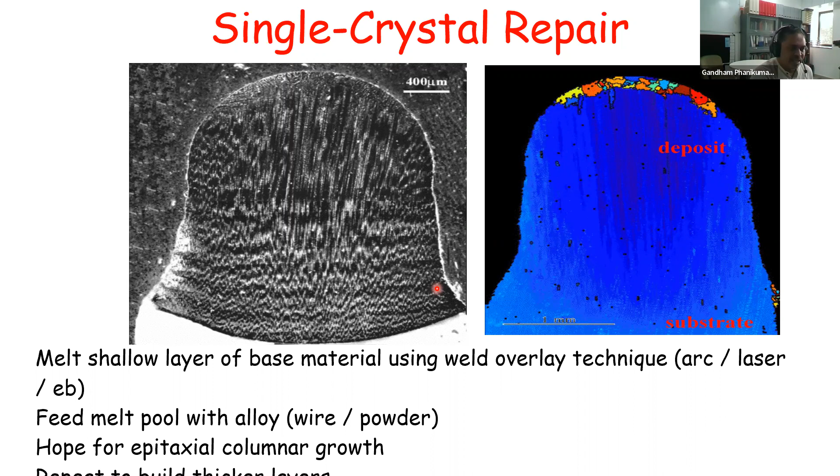As you could relate, the single crystal is able to grow all the way to the top, and that's how the single crystal was repaired. It's not actually very easy. So today in 2021, through additive manufacturing, it is being attempted again, and there are some successes already. Here is how it looks like.

The initial work was done by Wilfried Kurz in Switzerland, at EPFL, and he published his paper in '99. From then onwards, people were very excited that you could grow microstructures of what you like using laser deposition. Today that is called directed energy deposition, and the enthusiasm started to pick up.

If you were to make a bead using laser and chop it in two sections, this is a transverse section, and you would see that for a single crystal, if you melt it, you would actually get different orientations of growth. On the left hand side, the growth was happening laterally, and at the bottom it is vertically above, meaning there is a specific preference with respect to crystallographic orientations for growth. This is something we will delve into deeper as we go along, and also see how it can be taken advantage of.

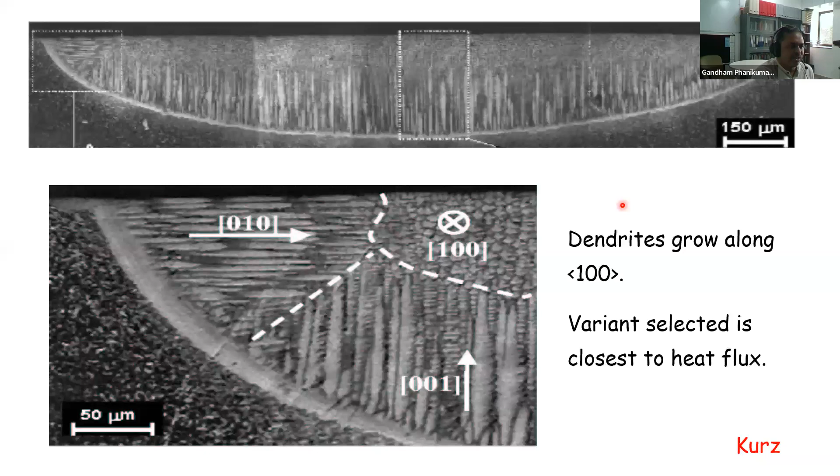Partly this is responsible for the improved strength of additively manufactured components, but it's also important to know that the nature of defects or microstructural formations like grain boundaries and cell boundaries are still relevant within additive manufacturing as well. For us to understand them is important to avoid any defects that will come, so I will actually discuss the defects as we go along.

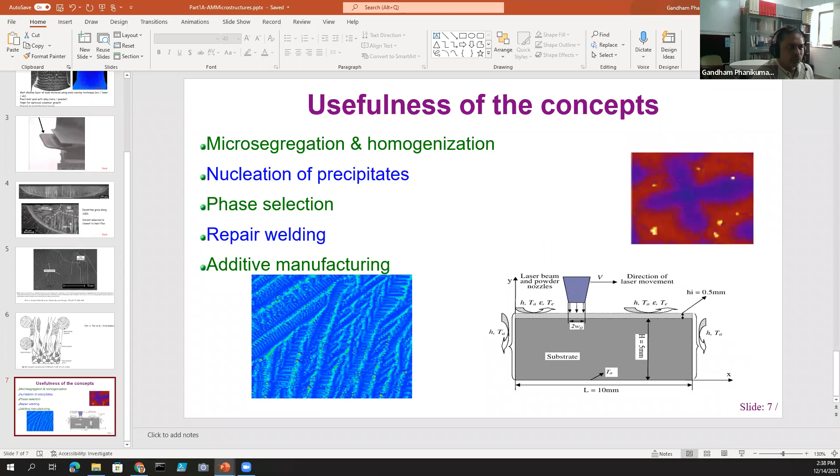And so solidification and defect formation becomes quite important. So what I do now is go on to open another PPT where I have the solidification concepts, and I do that to essentially illustrate some of these things.

Because I'm assuming that the majority of the audience could be from a mechanical engineering background. Can one of you respond if that is true? For example. Yes, Professor. Yes. Okay. So just 5-10 minutes of basic concepts of solidification may be useful for you, because that is happening.

So now you see my presentation has changed to the solidification concepts. Here is a video that shows you how an ingot is solidifying. The heat is going away from the left, right, and bottom walls, so the solidification is happening from left, right, and bottom. This is typically thought of as a tiny ingot in the case of additive manufacturing, so the liquid pool is like a tiny ingot. Solidification is happening very similar to the ingot casting shown here.

The contrast of a bright region being solid and a dark region being liquid is because of refractive index difference. You see that the solid that is forming is actually moving around, it's not growing straight from the side or bottom, it is actually moving around. So there's some convection that is also playing a role.

And these solid fractions are getting accumulated at the bottom, which is how the equiaxed microstructures are seen, because each of these solid particles is growing in the liquid equally in all directions, and then they are getting deposited at the bottom, and therefore you see that the equiaxed zone can be explained.

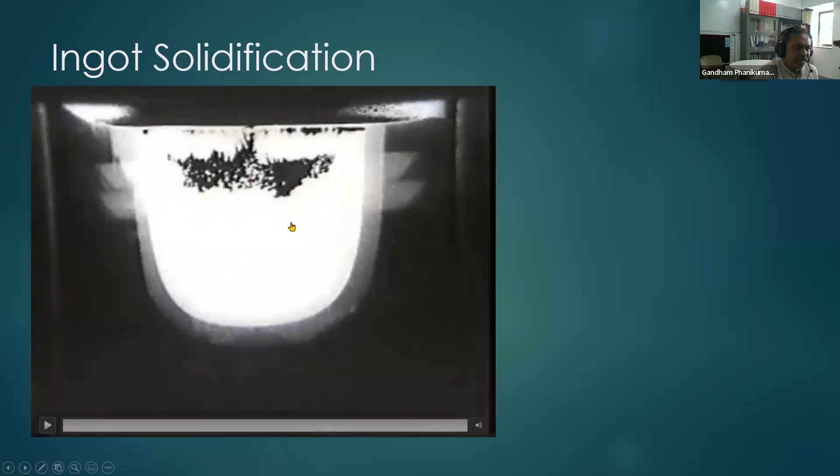As solidification nears finishing, some region of the liquid doesn't fill up the void, so you get shrinkage, known in casting as a pipe defect. In laser additive manufacturing, if the powder after melting doesn't fill the entire space, you get porosity. So the origin of porosity can be incomplete melting, which is one of the regimes we will see.

You can think of the laser molten pool as a tiny ingot, so learning how an ingot solidifies is useful to explain this.

Often we see microstructures in additive manufacturing with a cellular appearance, tiny regions of uniform spacing. This happens because the solid front moves into the liquid as a cellular front due to solidification microstructure evolution caused by the so-called Mullins-Sekerka instability. Originally if it starts as a planar interface, due to thermal fluctuations, the interface breaks and forms cells.

The cells are very stable structures and can have different orientations. You can see a grain boundary between two cells because their orientation differs, and there's a triple junction of grain boundaries, with one boundary growing this way. This is the solid-liquid front: this side is all liquid, and this side is all solid.

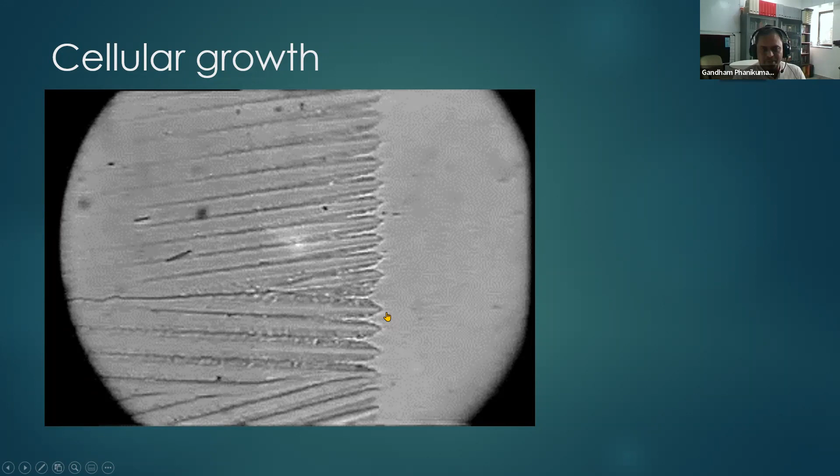Good question. This is at a large scale, and that is at a small scale. To give an analogy, when you look at a forest from an aircraft, it appears like a patch of green region, but when you descend into the forest you see the trees and branches. It's a matter of length scale. The ingot is at a large scale, on the order of the size of the melt pool, while the cellular structure appears when you zoom into a fine length scale, roughly a hundredth to a thousandth of the size of the ingot. So it's the length scale difference that made those patterns not visible earlier.

Okay, there's another question. In the ingot solidification part, when it was starting to solidify, we saw particles jumping off from their position and settling at the bottom. Can we predict before, and from where, the particles will get solidified and come to the bottom?

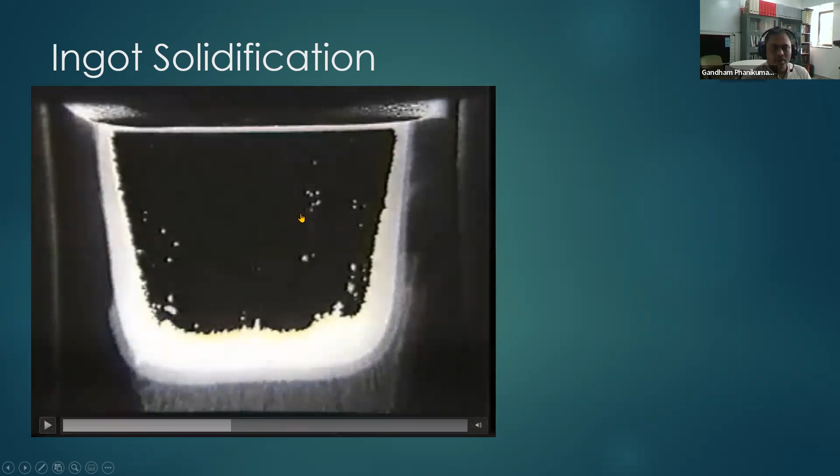Yes, it is possible. This motion of the liquid in ingot casting is predominantly due to buoyancy convection. In a laser molten pool, such as in additive manufacturing, it is predominantly due to Marangoni convection, which is surface tension driven. If the laser heats this region of the melt pool, the temperature is high here and low there, and that difference causes a surface tension driven flow called Marangoni convection. Today we can simulate these convective patterns and predict how the solid detaches and circulates inside the pool.

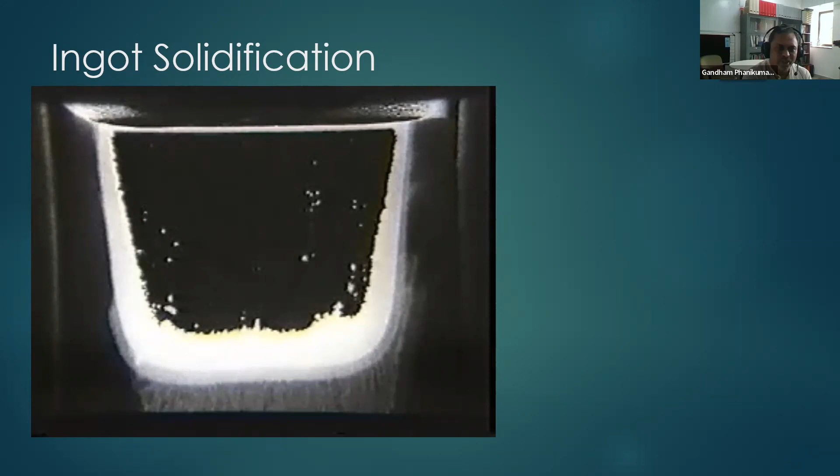This is actually a very well established topic. There's a paper of mine, first author Mohan Raj, from 2001, you can look at it. More recently, Arvind Kumar from IIT Kanpur, about 7 or 8 years back, showed the same kind of appearances in simulation. So it is possible to simulate these phenomena quite accurately today, but what I'm showing you here is experimental, so you get familiarized with the physical phenomena.

When you zoom into the solidification front a bit closer, you will actually see some tree-like appearances, which are also called dendrites. Nickel-based superalloys are very commonly found with this dendritic pattern, and the reason the dendrite pattern forms is because of anisotropy of its growth and surface tension.

Pay attention to the fact that there's latent heat released by the growing solid, because of which the side arms cannot grow, while elsewhere it will grow. So wherever interaction between the solids happens, latent heat is released and the side arms don't grow. A lot of patterns growing during solidification can be understood once we know how this interaction happens due to release of heat during pattern formation.

Now, what is it that is in between the trees? It is basically the liquid which is yet to finish solidification, and that is enriched with solute. In the case of superalloys, it will be enriched with aluminum, titanium, or niobium elements. These lead to segregation patterns, which if you etch, you can make out as dendritic appearances. So one can etch and look at the microstructures to see these patterns.

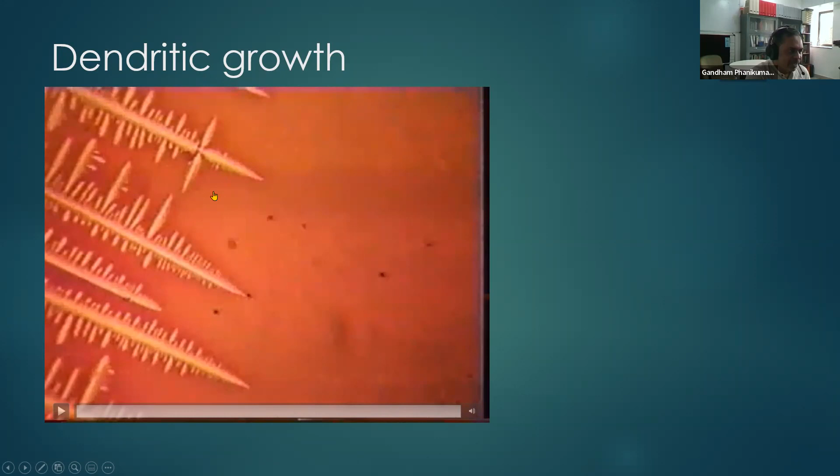The intermediate dendrite liquid will solidify and lead to full solidification. Sometimes if the liquid was not enough, it cannot come in, and then you see a defect called cracking - hot cracking will occur. We will come to that.

Now, how does this pattern formation actually happen during solidification? Here is a video showing a grain of solid as it grows. As it grows, you can start seeing the dendrites forming, and like a tree they are all growing, with a grain boundary also forming here - so this is a grain boundary.

These are all parallel dendrites that are growing, and in between them is the interdendritic liquid, which after finishing solidification will merge.

Now the reason why the planar front initially became cellular and then dendritic is because of the instability I mentioned, which is caused by the segregation of elements. It's called the Mullins-Sekerka instability criterion.

Of course, the starting point of it is so-called solutal segregation or constitutional supercooling. But Mullins-Sekerka instability is a better way of calling it, because in laser additive manufacturing the extreme speeds will play a role, and therefore Mullins-Sekerka is a better way of referring to it.

Now, when you wait for the solidification to finish, you will see that the interdendritic region will start to merge with the rest of the solid, and the patterns seen here will start to disappear because the liquid is finishing its solidification. At some point it becomes just a few dots of interdendritic liquid, which will also finish solidifying, and eventually you will see no contrast because it is all fully solid.

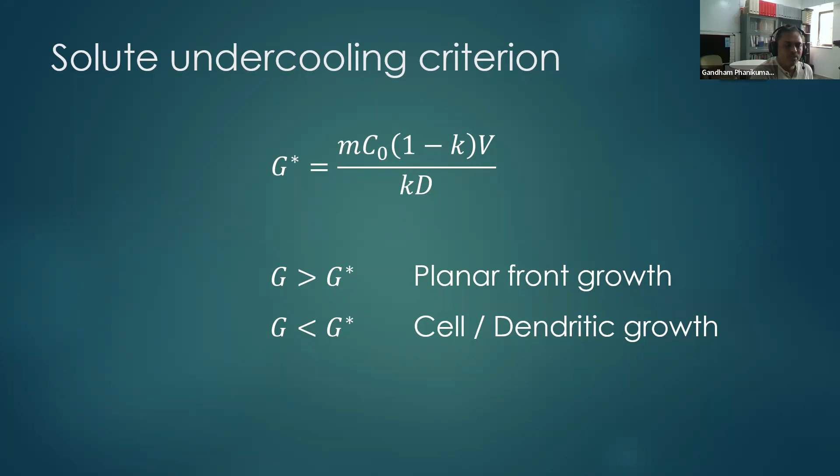This is the criterion I was talking about, the solute undercooling or constitutional supercooling criterion, which tells you when breakage happens. In additive manufacturing, the velocity, partition coefficient, liquidus slope, and concentration of the liquid are all known, so you can predict what conditions give you cellular formation. You'll see that you are actually in the regime where cells and dendrites are more stable for most additive manufacturing conditions.

Now, the equiaxed microstructure formation is evident here. Whenever undercooling or driving force is available in front of the liquid, instead of grains and dendrites growing, new grains nucleate in front. So equiaxed microstructure can form.

I'll repeat this again, since it's a very important phenomenon. You can see that in the liquid, the solid is nucleating, and these are the equiaxed grains nucleating because there is enough driving force for that to happen. That is also possible in additive manufacturing - if you go slow enough, you may have equiaxed growth taking place.

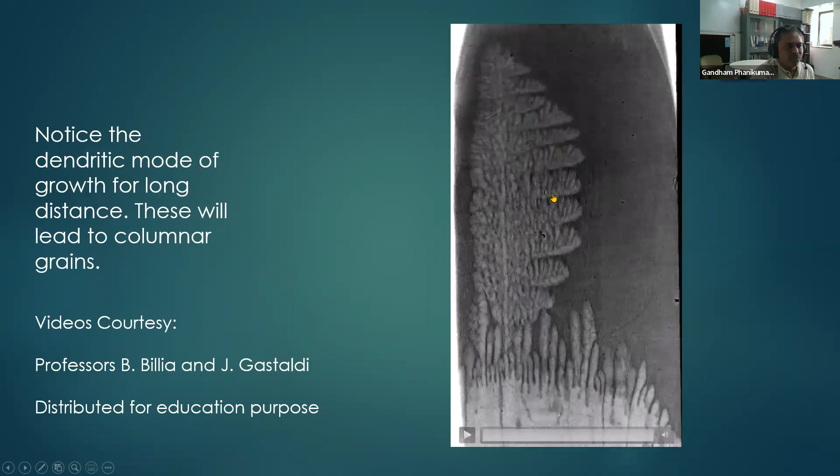Here is one more illustration showing how dendritic growth takes place, and we would like to be able to switch between these modes by changing process conditions, as we do here where equiaxed growth is also recorded. This is a synchrotron visualization of an aluminum alloy. The equiaxed microstructure formation is something you are seeing with your eyes, except enlarged and shown to you. But in real additive manufacturing, it's all happening at a scale less than 1 millimeter for the entire zone we are seeing.

Sir, yeah, sorry to interrupt. The microstructure you have shown is just for the first layer?

Go ahead. As we go along in some slides, I will show exactly which part of the laser molten pool is like that. It's actually a microstructure behind the laser. If you section it longitudinally, you can see these patterns quite clearly in any laser additively manufactured component. If you know which way the laser is moving, you can slice the bead, one single track, and identify these zones. In multi-layer deposits, full component deposits, you can at least see the shape of the pools, and within the pool you'll see the growth happening laterally. So you can relate the microstructures with what I've shown you.

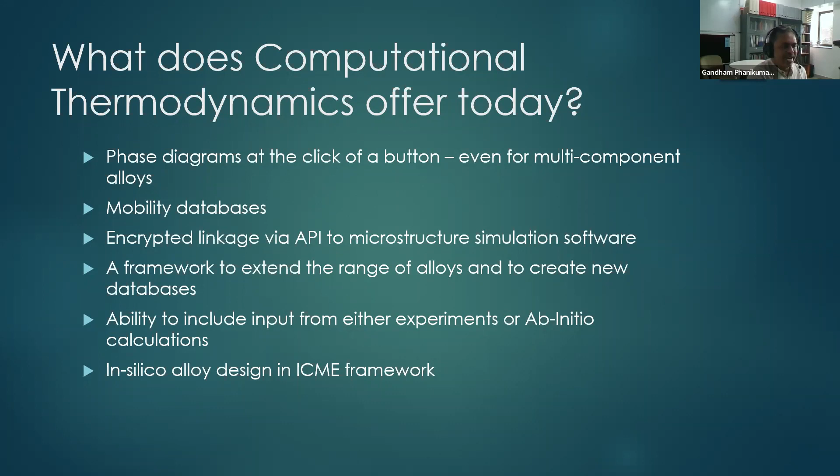At the click of a button, you can actually simulate these microstructures and look at how they change. So there are software tools available to do various aspects of what I have shown you.

Specifically for microstructure, there is a software called MICRESS, which uses the so-called CALPHAD approach to represent the driving forces for microstructural formation. It uses databases from Thermo-Calc, which are essentially encrypted databases of Redlich-Kister polynomials. For alloys like aluminum alloys, steels, nickel-based alloys, and so on, you don't need to worry about what microstructure will come. You can actually predict it because they are all simulatable, and I will show you some examples from our own group also.

So today, as you look at the various stages of alloy development, like casting or printing, or porosity, eutectic phases, precipitation, all kinds of things are now possible to be captured by simulation.

The software we are talking about, MICRESS, talks to Thermo-Calc and takes into account the actual alloy information, giving you parameters such as driving force, chemical potential, Gibbs energy differences, compositions, and properties like heat capacity and so on. Therefore, it will actually be able to simulate the microstructure. So that is a capability today.

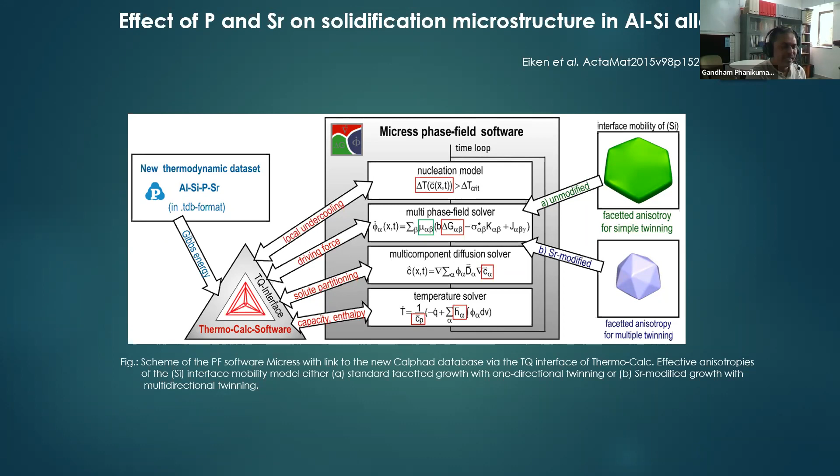By understanding the microstructural aspects, we are not necessarily going to an empirical approach, but there are tools available which allow us to even simulate and play with them to optimize a particular microstructure to be obtained by a particular 3D printing exercise. So I will now go further to show you some developments in that.

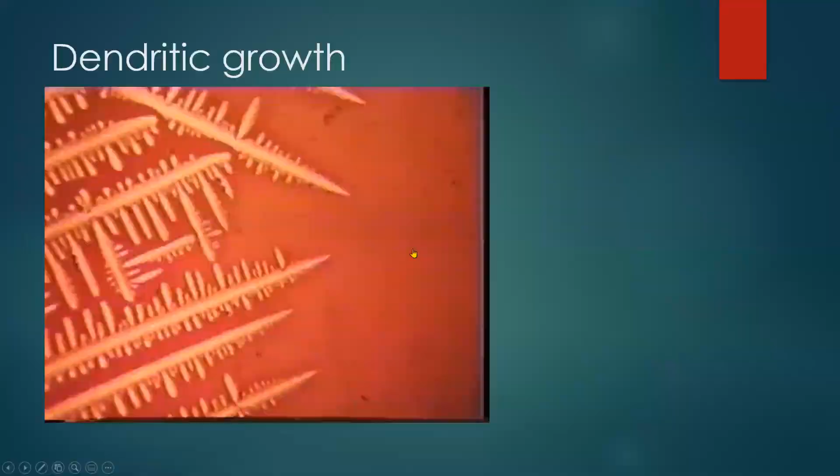Yeah, go ahead. Sir, in the previous presentation, could you open that for a while? Yeah, I can open it again, don't worry. So where do you want me to go? The previous two pages earlier. This one? No sir, the next one. So here, the previous one. Sir, the previous one. This one? Or this one? This one, sir. Okay, okay. Sir, if we play this, the thing.

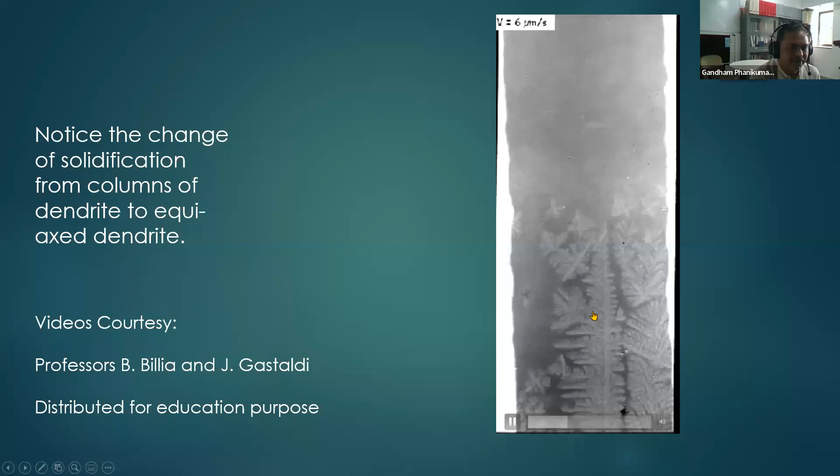So what you are seeing, I will tell you. It is actually initially growing slowly, then the speed has increased. So what happened is that initially it was growing as dendritic, but later on the equiaxed growth has taken over. This transition is called columnar to equiaxed transition. This transition happens in ingots, it happens in welding, it happens in additive manufacturing also.

Sir, if we start it from the beginning, there is a point where these grain structures are falling down. Yes, sir, please play it again. Yeah, they are falling off. Yes, yes, yes, sir. Sir, but some of them get stuck there. So there must be some opposing force against gravity, right?

So maybe I should tell you how this is done. This particular visualization was done between two graphite sheets, with a thin 150 micron aluminum alloy sheet kept between two graphite sheets, and then they were held by a boron nitride capsule around it, and kept in the path of a synchrotron radiation.

So what happens is that sometimes the grains are stuck to the wall, and some of them are nucleated between the walls, and therefore they are free, and therefore they fall in the liquid. So if they are not falling, it is not because there is an opposing force. They are just nucleated on the wall, and therefore they are stuck on the wall. That's all. Okay, that's the only reason.

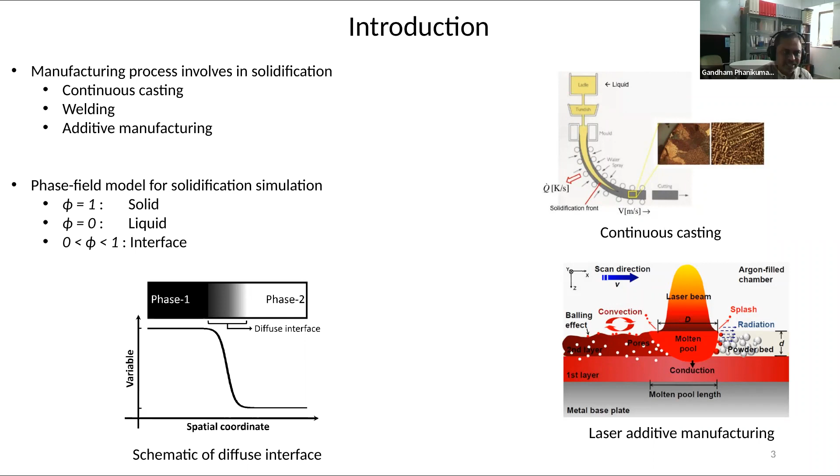So that is the scale we are talking about - a micro scale compared to the component. These ideas of solidification apply to continuous casting, ingot casting, and welding too. What happens in laser additive manufacturing is of particular interest for this workshop, but it's the same concepts, except the length and time scales are much smaller. That's the only difference.

Now, these are some of the equations we solve to understand microstructure evolution. Some of you interested in the mathematical approach can reach out to me. Ours is one of the few groups in the country doing this phase field modeling, and we have released our programs open source. If you search for microsim on GitHub, you'll find the programs that simulate what I'm about to show you. That's something you can also explore if interested.

Now, these solidification models have parameters important for an additive manufacturing engineer to know. For example, the thermal field is modeled with a given temperature gradient and laser heat source velocity. This means that when you change the laser velocity, or change the temperature gradient by preheating the powder bed, you are changing the thermal field during solidification.

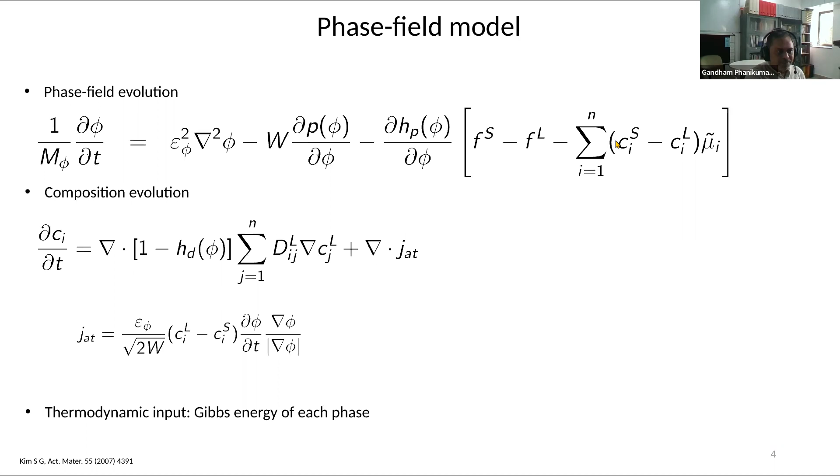Once you change the thermal field, it affects the driving force, and therefore it also affects the microstructural formation. So that's what we'll see here.

Earlier I showed you dendrite formation. Here is a computational dendrite, done on the computer to show the segregation of elements like niobium or chromium in a superalloy. The enrichment of niobium is shown here - wherever it's red, there's more niobium; wherever it's green, that's the average value. You can see niobium is segregated between the dendrites.

This is important because excess niobium can lead to Laves phase, which is bad news. So the ability to simulate segregation is important.

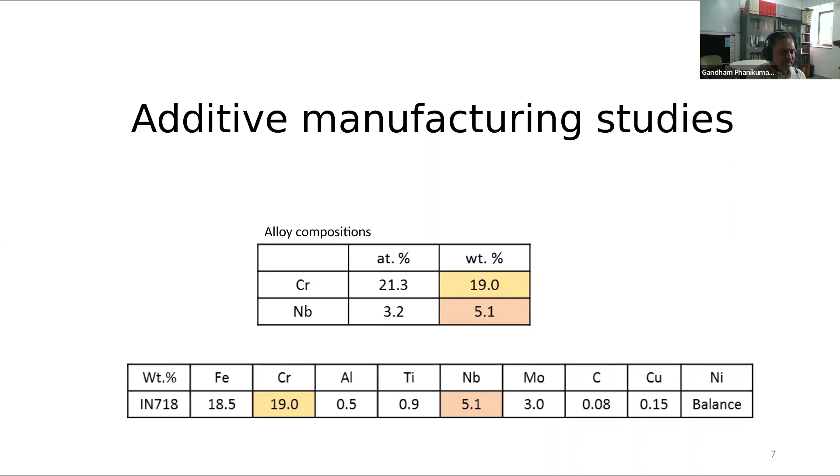Now in additive manufacturing, you can do that. The challenge in the past was that there were many elements - a superalloy has so many elements, so simulating microstructure evolution with all the elements was costly. But today it's possible, so we took this up to show you. Seven elements can be considered, and Mohan has done his simulations on a multi-component alloy.

You can simulate microstructure evolution in the computer at different processing conditions, like temperature gradients of 10 to the power 5 Kelvin per meter, or 10 to the power 6 Kelvin per meter. Think of it this way: if you preheat the powder bed, the temperature gradient can be reduced; if you don't preheat, the temperature gradient is high. So you can think of this microstructural difference as what happens with and without preheat.

The temperature gradient actually makes a big difference to the microstructural evolution. You can see that at lower gradients you get dendrite formation, whereas at higher gradients you get only cellular formation.

And therefore the spectrum of compositions explored is also different. You see that the segregations are much more severe when you have the interlocked regions in the lower gradient, but in higher gradient you do not have that problem. There's hardly any region that is red in this domain, which means segregation is not such a big problem. So that is a clear indication that by playing with the gradient, you can actually get the segregations under control. That's a first hint we can get.

And then we can also do a time evolution of what's happening because this is done in a computer. So to visualize what is happening during solidification at a small scale, you can do it in the computer. As time increases, you see the pattern formation changing for a particular gradient and velocity, which means the time evolution of pattern formation can also be understood, which can lead to explaining what happens at the beginning and end of a track, for example.

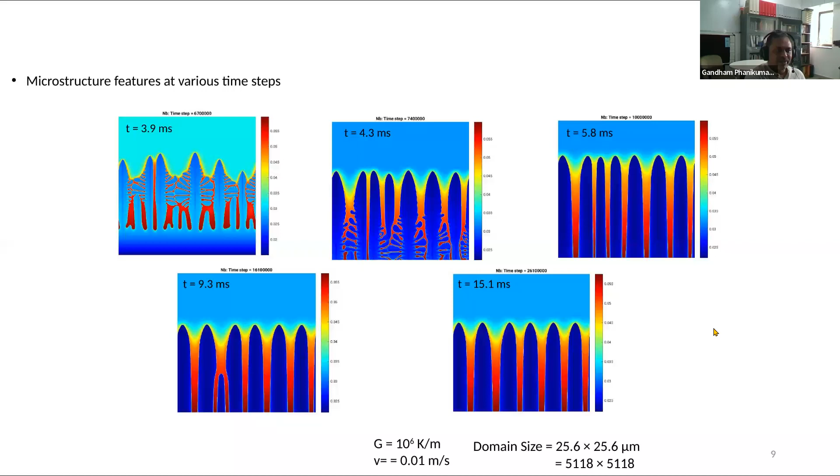Now we also benchmark these simulations. Here is an experimental specimen. The tracks are here, the laser tracks, the cellular patterns of the laser track is here. When you take a line and do the compositional analysis, you see ups and downs of the composition, like chromium content or niobium content. The simulation is shown in the bottom figures, showing we can reproduce those ups and downs of the composition quite well, in terms of wavelength and amplitude of the composition variation. If you calibrate it for one sample, you can reproduce it for many samples.

So this microstructural variation is something we can simulate and therefore also control, because we can always simulate for conditions and then go on to print such that we have the segregations as we want.

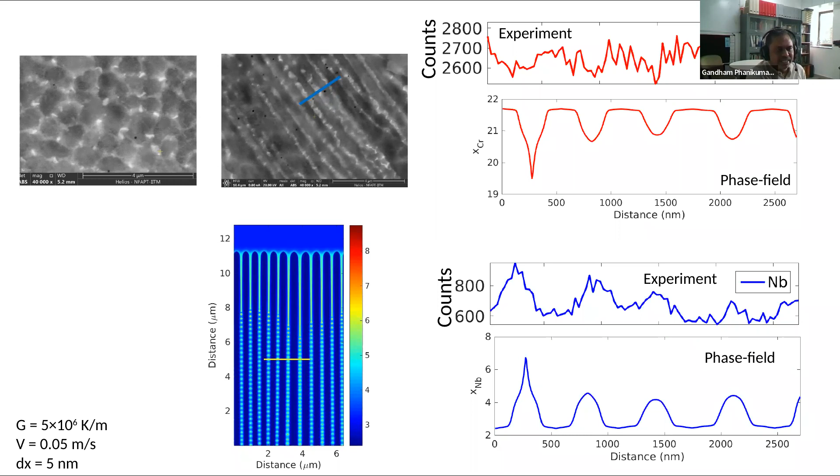Now what is the use of doing this? The advantage of doing simulations is that you can find out whether we can calibrate some known models of the spacings of the printed microstructures. Lower spacings mean higher strength. So we can calibrate such correlations, and thereby predict how the spacings change when you change the process condition.

So if you are changing the temperature gradient or changing the velocity of the laser, how does the primary dendrite arm spacing change? That variation can be calculated based on simulations you have done, and later you can use it for extrapolation. That is the idea.

Now, if you change the cooling rate also, these things will change, which means if you play with, let us say, helium removing heat from the laser printed component compared to argon, the cooling rate is more with helium. How that affects the microstructure is something you can predict by doing these simulations.

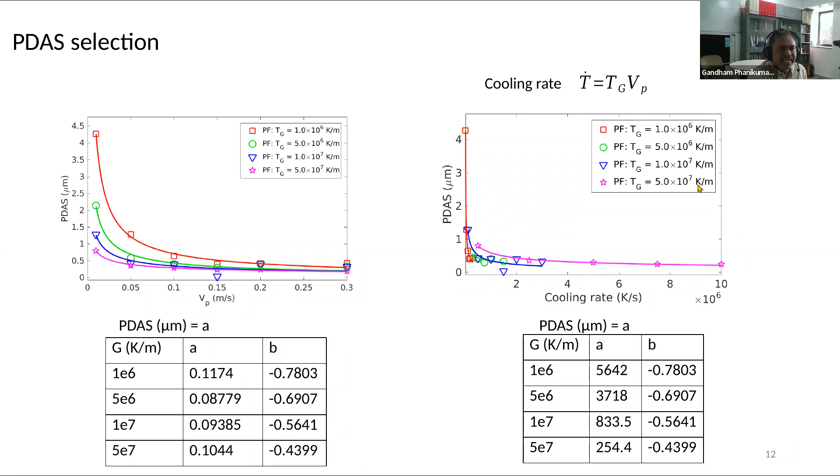So the primary dendrite arm spacing, for example, if you look at the red squares versus stars: red squares show that at lower gradient you are lower here, and at higher gradient you are up here. That means for a given cooling rate, the primary dendrite arm spacing increases if you have a higher gradient. Or, keeping it horizontal, a higher cooling rate would correspond to a higher gradient for the same microstructure.

So we will be able to understand the microstructure at every aspect of it, which is experimentally not possible. For example, what is the driving force at the tip of a dendrite? What is the undercooling we are facing, and what is the temperature of the tip, etc.? All of that can now be calculated, because once you have a calibrated model, we can do many of these calculations which are not possible experimentally.

Now, experimentally measuring the compositions is also available, but it's not possible to locate it everywhere, because the electron beam, which calculates composition in an SEM, has a particular volume from which the composition is measured. So if you want to make a composition map, it's very painful, and you can only do it in 2D. If you want to see how the compositional variation happens in 3D, phase field simulations can give you that. Here is an example of the chromium composition contours and the niobium composition contours in a three-dimensional representation, which is entirely possible.

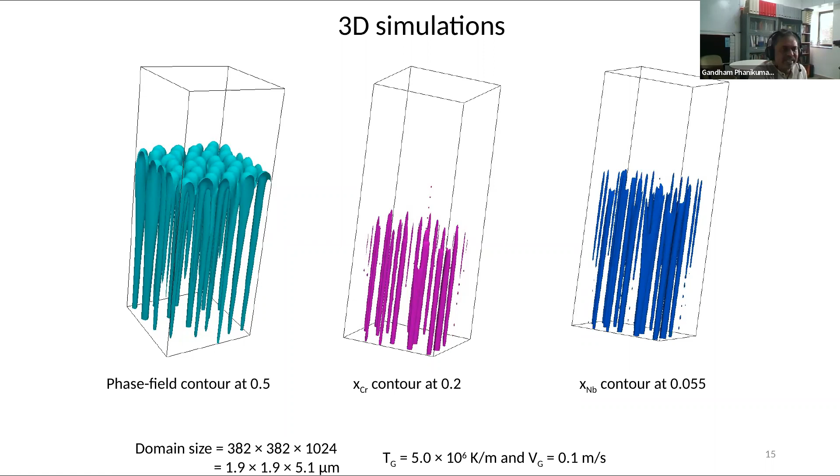You can look at these to see how the islands of compositional contours lead to a lock-in of phase formations, which we related to Laves phase formation at locations where the chromium and niobium content is high.

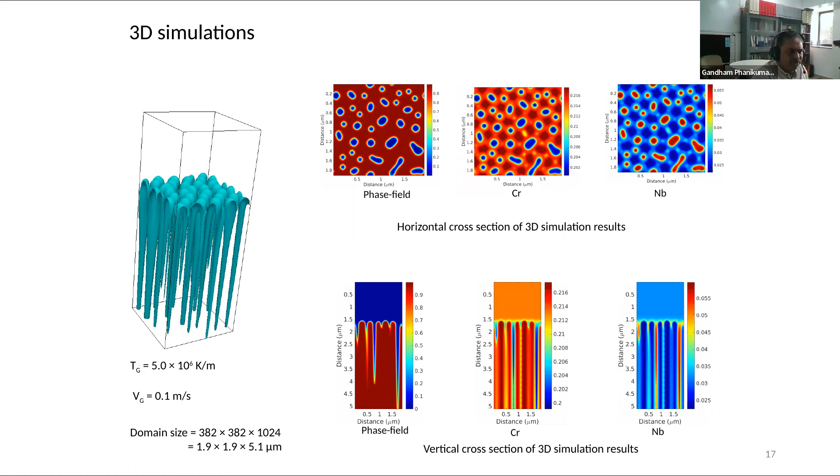That's a clue that we can use these simulations to start predicting the phase formation. So we will do that. We have validated these, and we will try to do that.

We refer to the so-called Thermocalc-Scheil calculation, and as a function of temperature gradient and velocity, we ask what would be the fraction of Laves phase formation and what would be the fraction of delta phase formation in superalloys. This shows there are processing conditions where it is very high, and certain other conditions where it is very low or tolerable.

This means you can tune the velocity of the heat source or the temperature gradient, via the powder bed heating or preheating, to actually achieve the fraction of the detrimental phase under control. That's a very powerful idea.

So Mohan's work has shown that there's a relation between the processing conditions and the detrimental phases that may form in the additive manufacturing scenario. The gradient values we have explored are relevant for additive manufacturing.

We can also go on to predict the kinetics of phase formation, because these can be calculated. When we do that, we are able to show that certain phase formations have a fairly leftward curve, which means their probability of formation is high. So those are the kinetics we can do.

We can also do bicrystal simulations to show how the space between two grains helps the liquid be present, filling the space and leading to prevention of cracks or not. So all those things can be done.

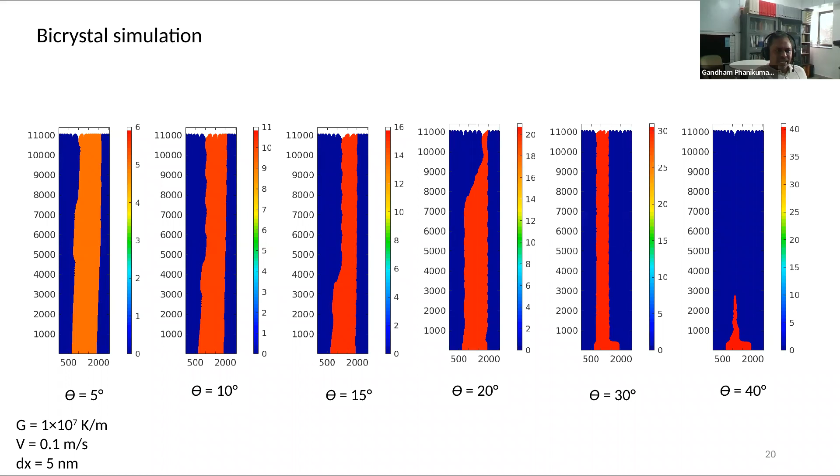So that kind of indirect estimate on the effect of grain misorientations on crack formation during solidification can also be thought of. Is crack formation a big deal? Of course. Those practicing additive manufacturing know that with certain alloys, they simply cannot make the cracks disappear, and that is something we need to understand quite well.

We can also do this for not only two grains, but multiple grains, to understand how segregation happens and how the grain boundaries are actually locations of slightly higher segregation. These are also benchmarked with respect to experiments, and we have to thank our colleagues for their help in doing these simulations.

I'll stop here and see if you have any questions on this aspect of microstructure formation before I move on to the remaining aspects.

Good afternoon, sir. Yeah, proceed. Yeah, sir, this is Pramod from IIT Palakkad.

Sir, when you show these simulations, but when we are doing the actual experiments, we generally play with process parameters like laser power, scan speed, hatch spacing, those. So, sir, how can we correlate those process parameters from experiments with these simulation parameters?

There are two ways. If you are looking at only the gross estimates, like what would be the porosity or the susceptibility to cracking, then there are some non-dimensional numbers that are defined. We will come to that in a moment.

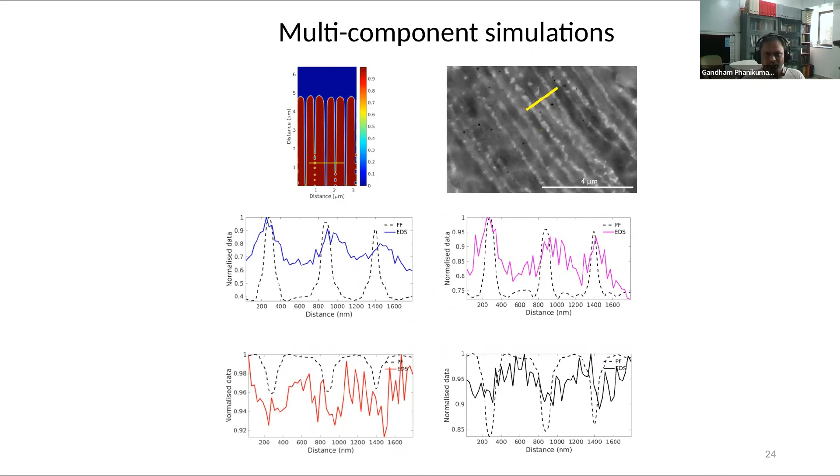Thank you, sir. My question was in context with, like, if I'm trying to develop texture control using additive manufacturing. Yes, so in that aspect, this is the way you should do for texture control.

Actually, there will be 3 models available. 3 models because you need the system scale model for the thermal field evolution. You would also need a grain structure evolution with the orientation information that is being captured. And you also need at the microstructural scale for segregation, because the segregation is relating to the interfacial energy, and interfacial energy plays a role in the grain selection, which leads to texture basically.

So the 3 levels that are available, and my student Hariharan is working on that topic, not specifically texture control, but his work has those elements in it. I'll be happy to put you across with him, so he can tell you which tools he is using, and therefore you can also then try the same. The tools are available.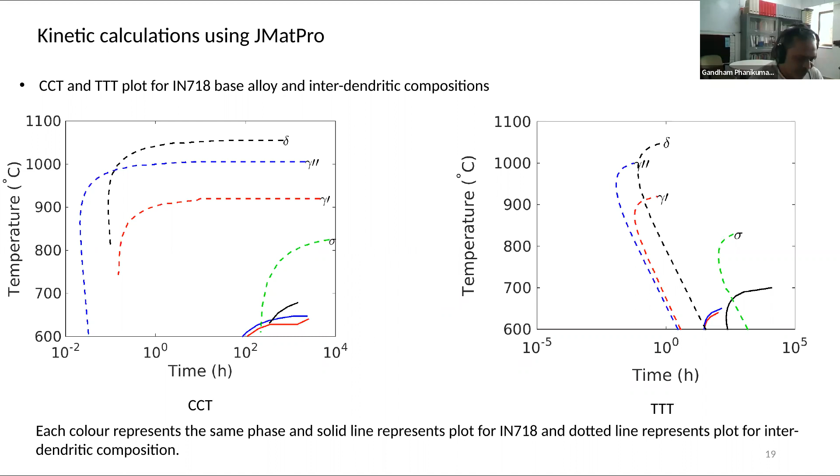Okay, so let's move forward now. So we have got porosity now. We just mentioned, so I will talk about porosity.

Okay, so this is about Hariharan's work. He is a joint student with Professor B.S. Murty and myself, and some ideas of porosity formation as a defect formation I want to show you.

Okay, now there are two. If you see porosity in an additive manufactured component, it might have had basically 2 origins. The first origin is because of keyhole. The keyhole idea, I have actually described the concept of keyhole formation in high energy beams in my NPTEL lecture on YouTube.

So if you search for NPTEL lectures with my name, you will see one of those. I have explained the keyhole formation, the vapor formation, etc. Now here I would just briefly tell you that when a very high power laser is incident on a metallic material...

...and if the temperature is increased to the extent that a small amount of vapor is formed, then that vapor will absorb the laser heat completely. Suddenly the efficiency of absorption will go from 10-15% to 100%, and therefore the laser will penetrate much deeper, and it will form a vapor column.

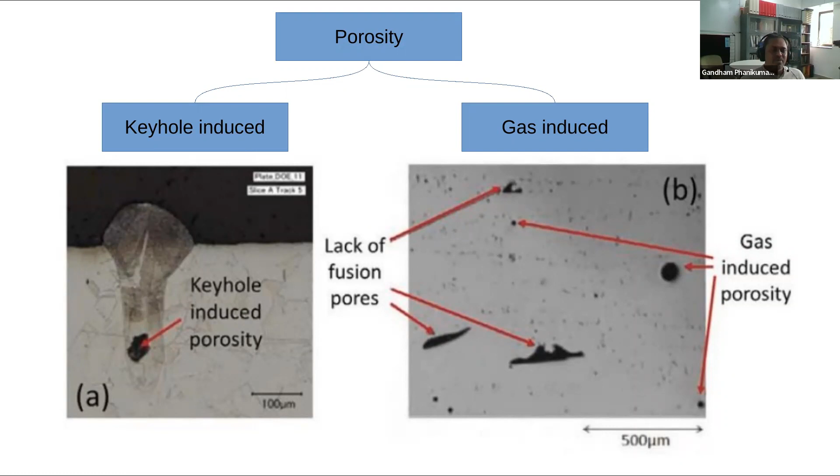The gas-induced porosity is difficult to eliminate using the powder characteristic, laser characteristics, because it is actually coming with a contribution from the powder consumable. So it's a consumable problem basically. As you can see, there is a way by which we can understand defect formation in additive manufacturing.

Lack of fusion and keyhole both give you porosity, but they're on different sides of the power spectrum. With very high power, you get keyhole porosity. With low power, the velocity is too fast and doesn't allow the powder to fully melt, giving you lack of fusion porosity. You have to distinguish between these two types and balance them to get a good deposit. Balling is another defect, possible when your power is high but you don't have enough time for it to sink and deposit at the bottom of the powder bed, so it can lead to cohesion with the rest of the solid.

There's a nice review by a leading expert, DebRoy, on these aspects, because quite a bit of our understanding is coming from welding. You could look at that review for more on this.

Now here's a very nice paper, which I like very much. It's also very recent, from this year itself, where they discovered a non-dimensional number using which you can predict what density you will get, that is, how much porosity you can eliminate. This is something where, without going into the details of microstructural formation, you can empirically predict what kind of density you can get. We have verified this and found it to be a very good measure.

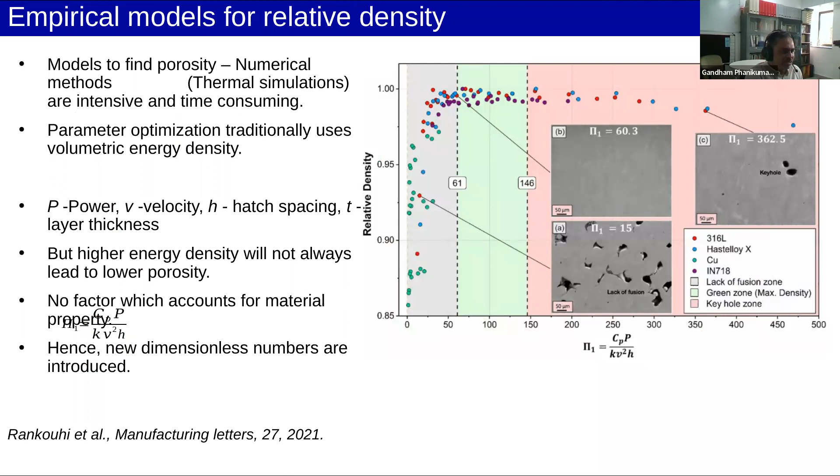This data has come from multiple alloys, so it's fairly good, and it's available as an empirical correlation in the paper. That correlation is given here, and it takes into account the energy, or power input to the powder, E_in. E_in itself is defined as a combination of parameters: power, velocity, hatch spacing, and layer thickness—power divided by the three quantities velocity, hatch spacing, and layer thickness. That E_in going into the calculations is a good idea because it takes into account some of the physics.

So these can be used to eliminate porosity formation as a first cut. If you still have porosity, that means there's something to worry about with the consumable material, and that's where we need to do more work. If your consumable doesn't have a problem with too much adsorbed gas or something, this correlation is fairly good to get you the kind of density it predicts.

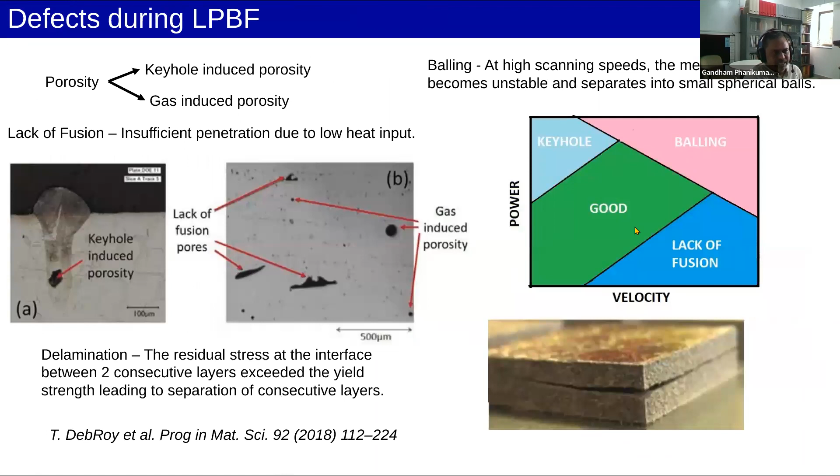Now there's another concept that has come into the literature, again this year's latest paper, called the keyhole number. Basically, this diagram is originally empirical, and it has been explained in a phenomenological manner using the keyhole formation, the likelihood of keyhole formation as a function of the parameters used for the laser: laser power, efficiency of absorption, thermal diffusivity, scan speed, and beam radius. These are all used to comment on how keyhole formation can happen, and the keyhole number tells the probability of that formation—if it forms, you're likely to have porosity due to that.

This is, I'd say, a nice outcome of decades of knowledge about keyhole formation in laser welding. It hasn't come out of the blue—a lot of physics has gone into understanding keyhole formation over the last several decades, and today it's coming into use because it's being applied to laser additive manufacturing to understand porosity formation.

So what you could do is have a scheme where you first do the thermal model, and then using those conditions, check the printable map, which is shown here and available empirically. You can calibrate some of the observations to know where these transitions are occurring.

Once you have that, you can use a single track to do those calibrations and ensure these lines are available, with some statistically meaningful calibration, because powder distributions always have slight width. If you have 30 micron powder, that doesn't mean everything is 30 micron - it's a range of, say, 20 to 40 micron. So certain variation is possible, and if you take those variations into account and calibrate, you have fairly good ability to get tracks which are defect free.

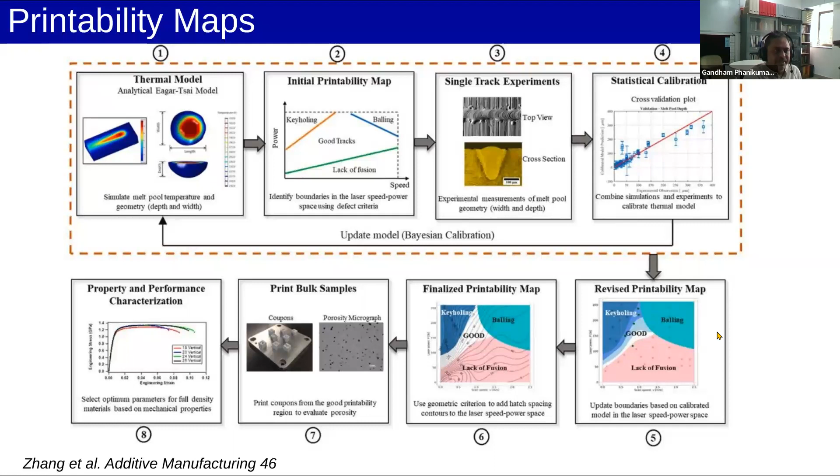Now the tracks are shown here as an example. So visually you can make out, when you make a single track, whether the defect is a balling kind of defect, a lack of fusion defect, a keyholing defect, or a good track. You can do sections to understand which of the 4 regimes of the map we are operating in, and thereby calibrate our specific consumable and processing conditions with this map. After that, we can operate in the region of safety, the white region, which is the good printing region.

Okay, so some suggestions based on the trials which Hariharan has been doing over the last year or so. If you wish, you can get some property data from the ThermoCalc database, because you can avoid having to do serious ML - all the properties are available from the thermodynamic database anyway. So you can use that, he says.

You can also do this for individual alloys, but you cannot do it across alloys, because the properties of titanium alloys change quite drastically when you go from alpha alloys to alpha-beta alloys to metastable beta alloys and so on - individual alloying elements play a big role in segregation behavior and liquidus temperature. So therefore, we have to apply these concepts only for specific alloys.

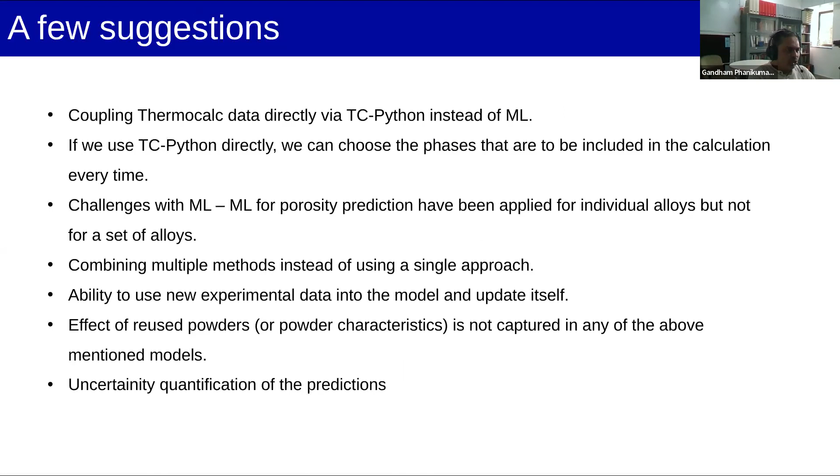Okay, so I'll stop the porosity part here and talk about cracking. But before that, I realized I didn't talk about microstructure formation. I will go there and show you some of that, because that's also very important for conceptual understanding. Then I'll move to crack formation and wrap up.

So we are halfway through now. Let me just pause for a few minutes - you can ask me some questions if you have any, or tell me how you are finding it. Any fundamental doubt that you have, you can ask me now.

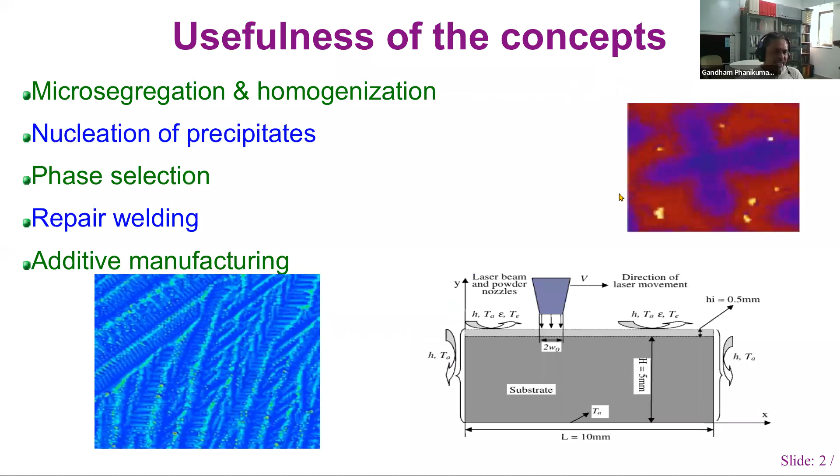I will tell you some more concepts of microstructure formation so that whenever you see the additively manufactured component, you can understand the microstructure slightly better, and imagine what more is going on there. So here is one concept called the interface response function.

In a few months from now, we will be releasing a program which will let you calculate it, so don't worry about the theoretical complications. But I want to tell you that the metallurgical knowledge of the interface temperature during solidification, as a function of the initial composition, the partition coefficient, the gradient of temperature in the solid, the gradient of temperature in the liquid, the velocity of the interface, the radius of the dendrite tip, and so on, can all be modeled today through analytical modeling.

The only difference between casting and additive manufacturing is that in additive manufacturing you always have a build plate, so there is always an initial solid growing into the liquid pool, and therefore thermal undercooling can be neglected. That's the one difference with the model, but the remaining things are all applicable, so one can use the casting literature or welding literature and apply it to additive manufacturing.

So what do we mean by the interface response function is the interface temperature. Now, why is it important will be evident in a moment.

Now, you see that when there is a segregation of elements, as you have seen in dendrite formation, between dendrites there is an enrichment of solute. What happens is that enriched solute, when combined with the liquidus slope, gives you the undercooling or driving force. This kind of driving force is called solute undercooling, or constitutional undercooling. Now, that's a driving force for solidification, and that is one of many types of driving forces.

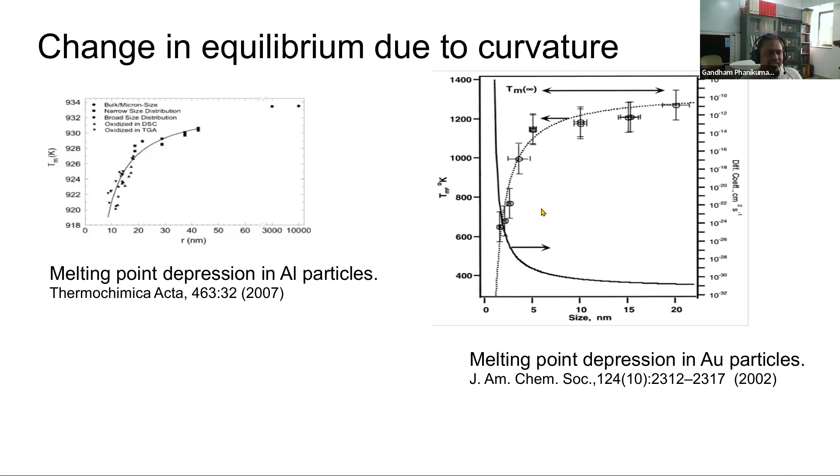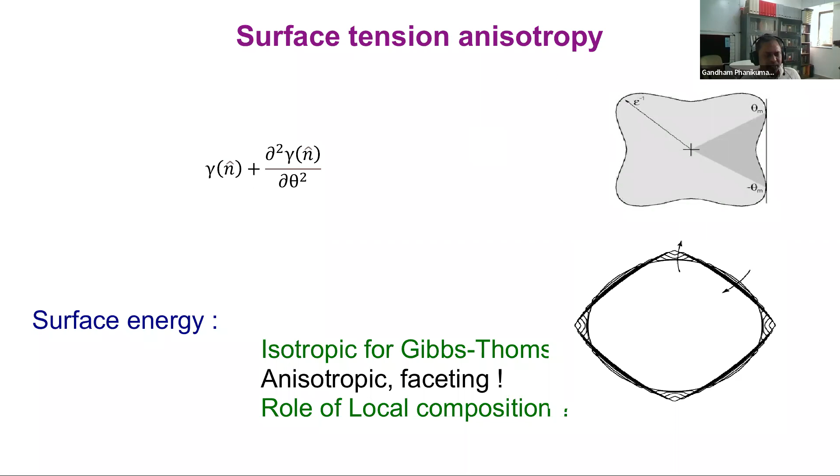Now, the driving force is then combined with the surface energy, which is anisotropic, and together will lead to various pattern formations such as facets. Facet means sharp faces. Sharp faces are bad news, they are not desirable. What kind of phases have sharp faces? For example, intermetallic compounds, particularly the detrimental fellows, usually have sharp facets, and we don't want them, because they are detrimental, and the sharp face also means that a crack can move between the intermetallic compound and the matrix a bit faster, so they are actually a double whammy.

Now, the last undercooling is because of the velocity of the laser being very high, that's called kinetic undercooling. So here is the velocity of the laser or heat source, or velocity of growth, and this is the kinetic coefficient, which is also anisotropic. A combination of all these terms is what gives you the interface temperature. So the interface temperature is not the melting point, it is reduced by a certain magnitude because of the surface tension effects, because of the composition effects, as well as because of the kinetic effects.

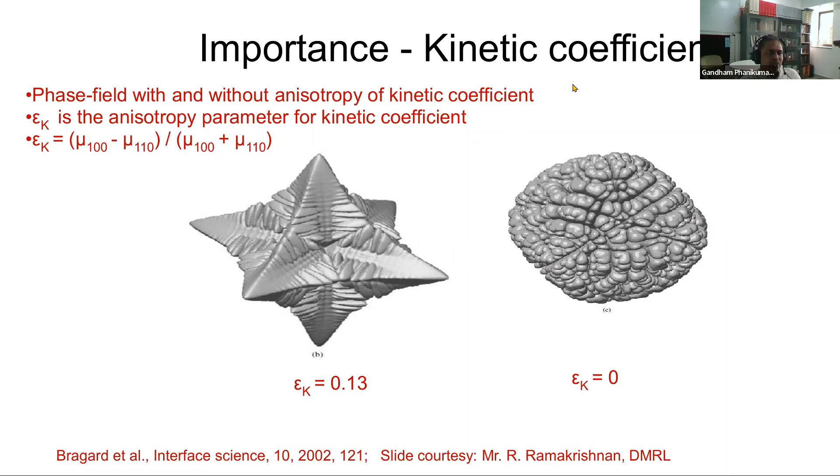Now, all those things will actually lead to morphology changes. The kinetic coefficient itself, mu, can be anisotropic, which is different in different materials. It can show that a crystal growing can be a beautiful dendrite like this, or it can be like a ball, which is isotropic. So anisotropic or isotropic growth are both possible given a material, depending on the anisotropy of the kinetic attachment coefficient. There are models available for this; we have done that work, and we can simulate the growth of solids in a molecular dynamics framework and determine some of these coefficients. That was done by Ramakrishnan during his PhD, and we found which plane and which direction have less interface energy, for example, and what is the magnitude of difference with respect to the faster and slower phases.

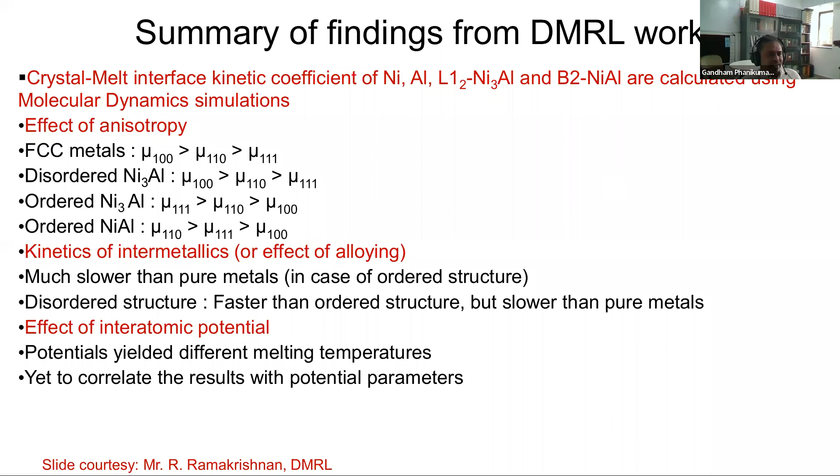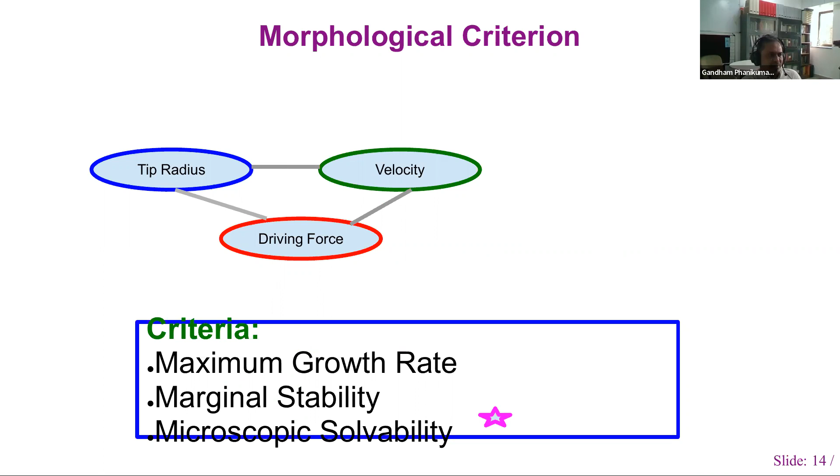Those can be documented from molecular dynamics runs, and they will be directly affecting the morphology formation. So all those are inputs from molecular dynamics into the mu. The diffusion field can be solved, and that will go to the C. The thermophysical data gives you the surface energy, and the velocity of the laser torch also gives you the V. So all of these can be calculated to find out the TI, which is nothing but the interface response function. And that, combined with process parameters like velocity, can give you a lot of information about the driving force for solidification.

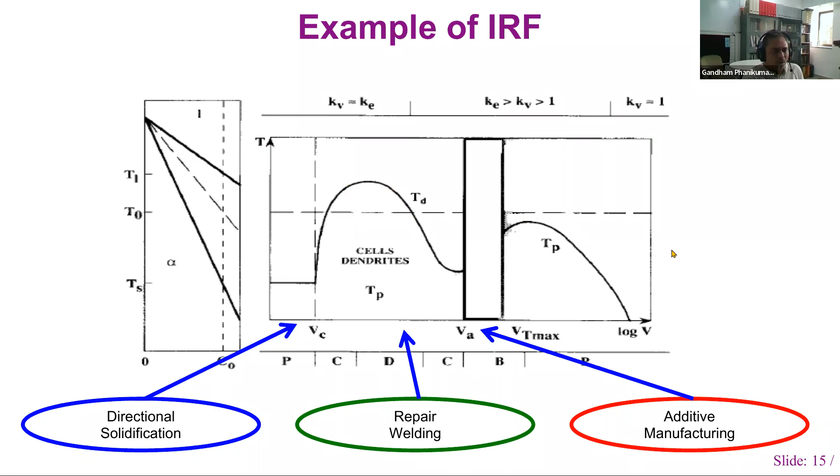This program to calculate this is being made ready by Hariharan as part of his PhD, and it will be used in conjunction with additive manufacturing, because in additive manufacturing we are on the right-hand side of this particular plot. So there's a phase selection that is possible here, and we can capture it to understand which phase is forming at what velocities. That way we can actually control the microstructure also. Particularly for titanium aluminum alloys this is very important, because you may want to play with it to get a specific phase to solidify upon printing.

Once you have that information, you can go on to change the gradient for which you've done the calculation, perform calculations for every gradient, and thereby make a microstructural map. That is a very powerful idea, because what we mean by microstructural map is: if you tell me the alloy composition and at what gradient and velocity you were doing the printing, I will tell you what phase will be there and what microstructure will be there. That's almost like a prediction that is possible.

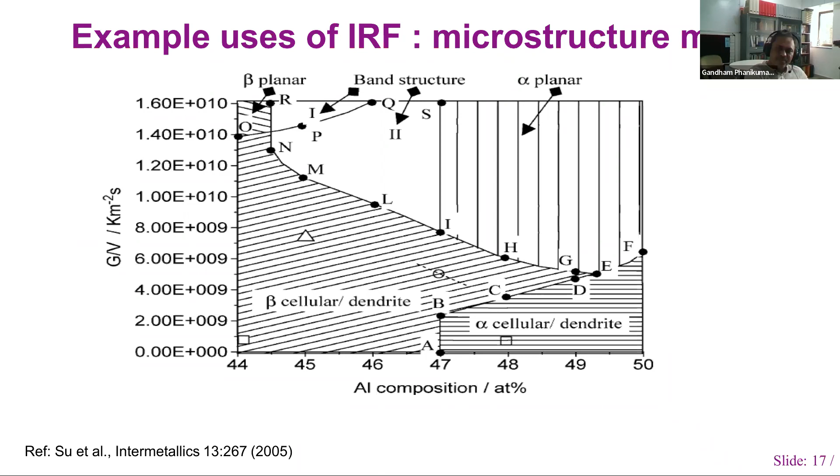One piece of information that comes along with this discussion is that the velocity and interface temperature are related to undercooling, because undercooling is nothing but Tm minus Ti, the difference between these two. So that can be used as one of the parameters on the x-axis, with velocity on the y-axis, and they can be correlated experimentally. Once you know them, you can make simulations of how the microstructure will form.

This map is something I want you to relate to what you saw in the video at the beginning of the lecture. I showed you that you can have cellular microstructure growing, and you can also have nucleation of grains in front, which will settle down and form equiaxed growth. So there is a competition between columnar growth and equiaxed growth.

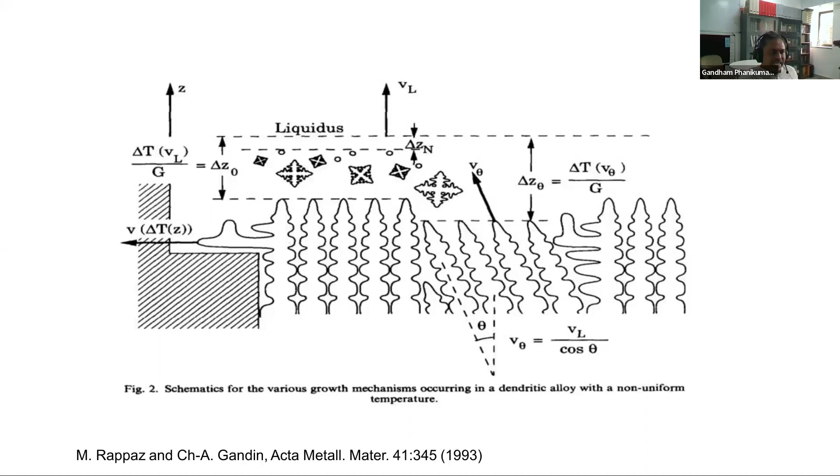One important parameter for the competition is the velocity with which it can grow. That velocity is mapped with the undercooling in this manner, coming as an outcome of the interface response function. Today there is a mathematical way of describing that, and once you put that in, you can calibrate the number of nucleation events that can take place, and start to simulate microstructure and grain formation. You can simulate in the computer how much columnar growth is possible and how much equiaxed growth is possible. That is a reality today, and we have simulations that are possible to do this in a very easy manner.

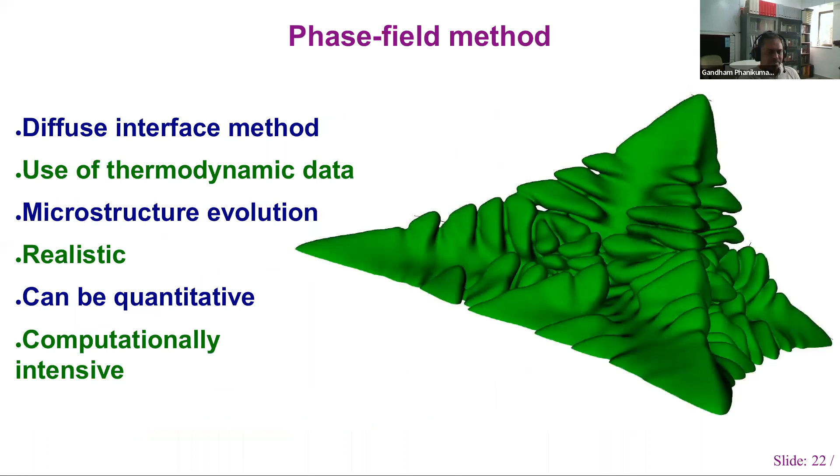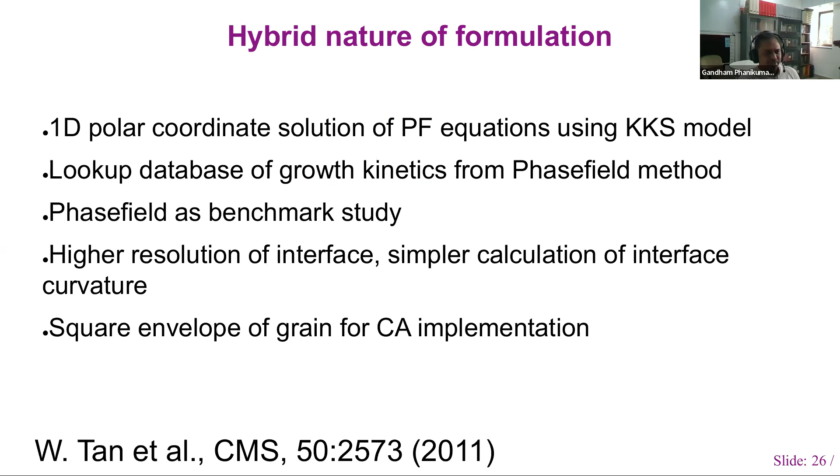You can also use those same concepts to relate to microstructural simulations. Phase field simulations can be done, and you can combine them to predict segregation patterns, and these can be related to additive manufacturing quite easily, because the difference between casting or solidification welds versus additive manufacturing is only in terms of velocity. So today if you see microstructures of that type with segregations, all that is very amenable to calculating. It's not something you need to worry about in experiments—you can calculate them and have the segregation levels under control.

I stop here for the segregation part, and then I go back. Last topic for me would be the cracking, the crack formation during the welds. So we have seen the property, we have seen the porosity, but cracking alone we will see now.

The cracking phenomenon is a very extensive topic. There are multiple volumes of weld cracking available, and there's a nice review of it by Eskin in Progress in Material Science. It's a fairly large paper, so I recommend you read it whenever you encounter cracking in any of the built components.

Of course, this paper is not on additive manufacturing cracking, but additive manufacturing cracking is no different from the weld cracking that people see, because the weld overlay is exactly the same as what you do as a track in additive manufacturing, and therefore the same concepts will apply—except the size, which is a bit smaller in additive, but the same concept will occur.

Whenever we talk about cracking, there are some names that are used by people. They talk about what's called solidification cracking.

There are some names used by people in cracking: strain age cracking, liquation cracking, and solidification cracking. Sometimes they use words like hot cracking and hot tear. Are these very different, or are they the same? This is something one should know. I want to tell you very clearly: solidification cracking, hot cracking, and hot tear are the same concept. Liquation cracking is a bit different, because it occurs due to a eutectic melting upon reheating. During solidification, it is solidification cracking or hot cracking. But during reheating, if it occurs because a eutectic region has molten, that's called liquation cracking.

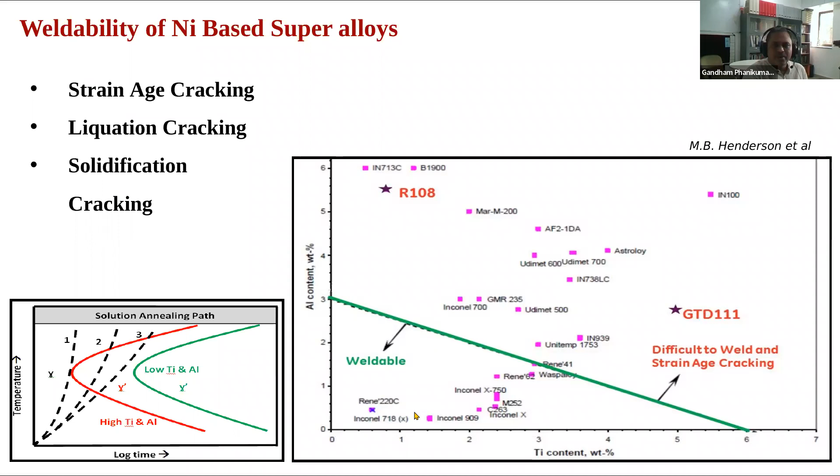So how do those cracks look? Solidification cracks can be quite serious, in the sense that the material has such a big crack that you simply cannot heal it and you can't use the component. The component has to be thrown away. If you know the cost of printing a component, it can run from about $1,000 to $2,000, depending upon the size. And if you have to throw it because there's a big crack, that's quite sad. So we must understand this phenomenon carefully and avoid having that in our printing.

Now if you go back and look at liquation cracking, the location of liquation cracks is slightly different. They will show you the eutectic formation nearby, and therefore you can make out that yes, there is a liquation that has happened—a eutectic that has formed liquid during heating, and then that liquid has gone around and created a crack. So that is something you can make out.

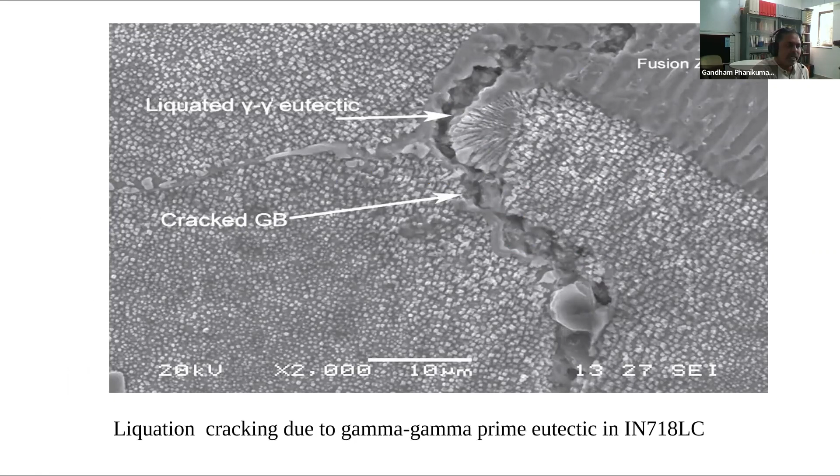That liquation cracking due to eutectic formation and eutectic molten phases can also happen because some of the carbides can form a eutectic with the matrix. So whenever you have got chunky carbides in superalloys, you can have a eutectic between them, and that can also cause the liquation. So one has to be very wary. You may want the precipitates because you want the strength, but eventually that should not lead to these problems.

The reheat can actually cause that kind of formation. So if you have niobium carbide, for example, this weld reheating will lead to a liquid formation, forming a crack, and then you will have a problem.

So here is where you should relate these things back to what I was talking about in the first hour, namely the segregation of niobium. If you have any segregation, you will see that some of these possibilities of eutectic formation or compositions approaching a lower liquidus temperature regime become very much possible, and therefore we should eliminate such possibilities and avoid serious segregation levels from taking place.

That's one of the reasons why we have to understand segregations. Otherwise, it's not as if we have a design and we can just print it. Only when the print cracks do we understand how bad the situation is, and unless we solve it, we can't actually go on to print one more component as trial and error, because each trial is very expensive.

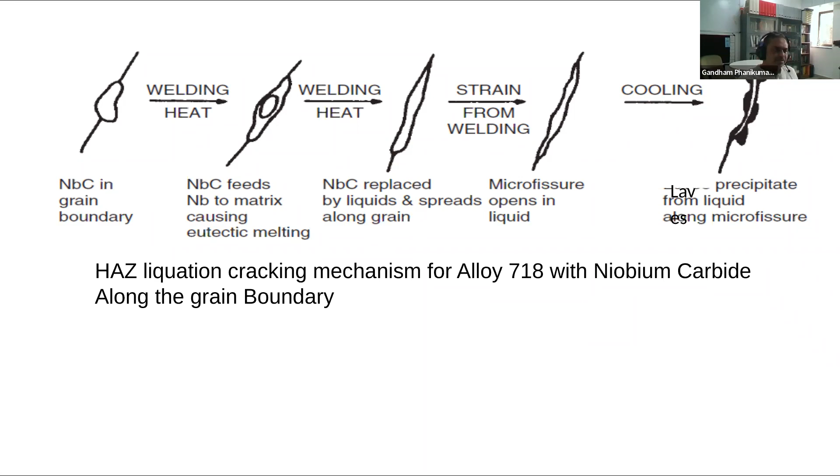Hot cracks—how do they look? If you take a bead of weld, it looks like the entire bead has broken in the middle. It can be quite severe in that sense. So some understanding of cracks is important for you, because these are the same concepts as in additive manufacturing.

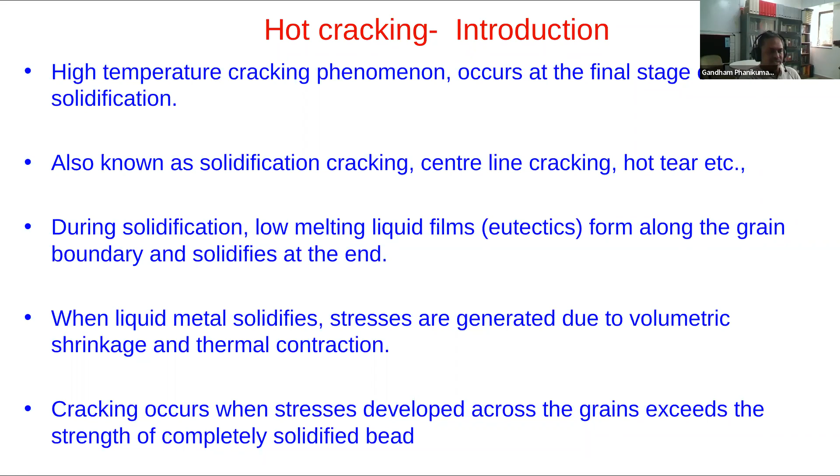The hot cracking, or solidification cracking, or hot tear, occurs towards the final stage of solidification. It is also called hot tear or centerline cracking in welding, but just hot cracking in additive manufacturing. It occurs because stresses are generated due to volumetric shrinkage and thermal contraction, and that leads to crack formation. In welding, this is related to the fixturing as well as the welding parameters.

In 3D printing, the thermal cycle is quite well established. You can think of the weld parameters as replaced by the printing parameters. The weld fixturing can be replaced with the geometry of the printed component, and the alloy composition with the powder composition. So all three can be mapped over to printing, but the physics of hot cracking remains the same—it's the same problem that occurs in superalloys when you don't take care.

Are there examples of alloys which will surely crack if you just try to print again? So CMSX4, for example, is a superalloy, and it's a very important alloy. And if you don't take care, if you print it, sure enough, it will actually crack. So you have to take care of cracks in some highly crack prone alloys like CMSX4.

So what are the various factors that affect the cracking tendencies? There are metallurgical factors as well as mechanical factors. Metallurgical factors are about the material properties such as the solidification range, that is the temperature of solidus and liquidus, and dendrite coherency.

By that we mean how closely are the dendrites with each other during the solidification, so that they can actually form bridges with each other, for example.

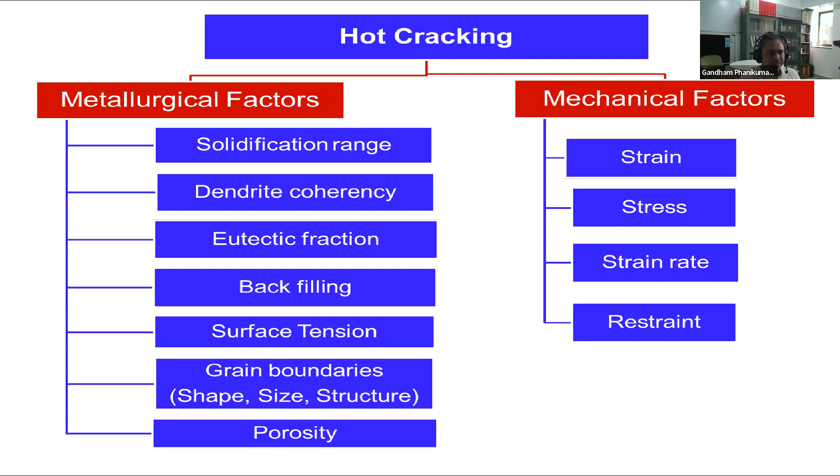So there are various theories that are available. I will go through some of them. One of the celebrated theories is by Lippold. I will not go through all of them, I just mention that there are some names you must have heard of, that's why I'm mentioning these names.

Prokhorov's name is very popular in cracking, because anybody who's talking about hot cracking should have mentioned Prokhorov's model, because he was one of the first successful models to explain the cracking tendencies. He actually said that by looking at the strain as a function of temperature, and then whether it exceeds a critical value or not, you can comment upon crack formation or not, respectively.

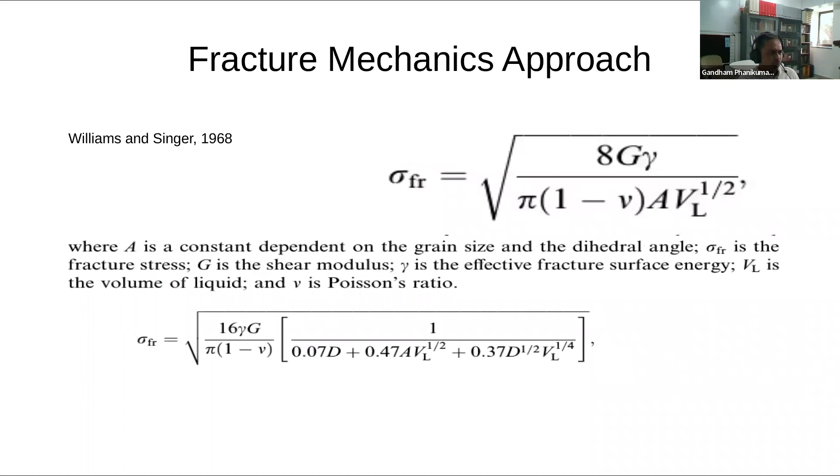And I go to the strain rate-based models. So the most, as I told you, the first major successful attempt for explaining this hot cracking was by Prokhorov. And then there is a very celebrated criterion, everybody should hear about it, the so-called RDG criterion, that explains why cracks form in any solidification process. He has explained it so beautifully that it is applicable for casting, welding, and additive manufacturing.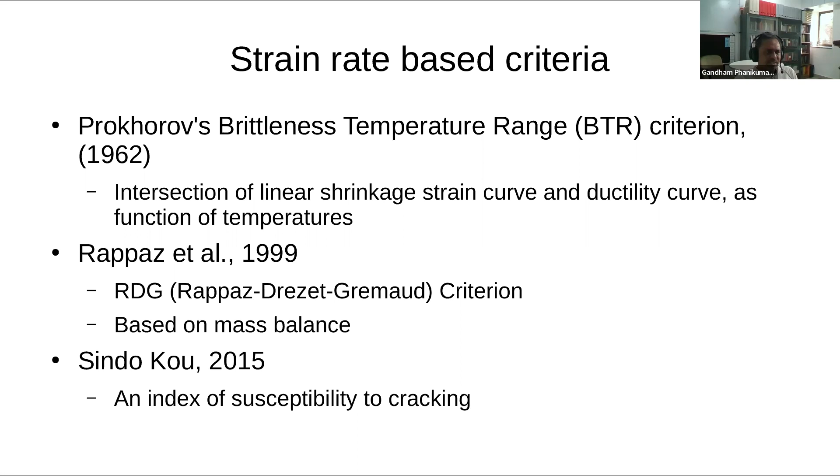So it's applicable in all problems where solidification takes place. And Sindo Kou has simplified that particular paper by taking a small portion of that analysis to give a gradation of alloys which will crack more and which will crack less. That gradation, by what is called the cracking susceptibility, was very useful because it will let you grade one alloy as more crack prone than another, which is very useful to know. However, it doesn't help you identify conditions under which crack-free solidification can take place. That's a limitation of the Kou criteria.

The Prokhorov BTR concept says that there is basically a temperature range where the ductility is not available, and therefore the shrinkage cannot continue at the rate you are doing, and then it will crack. So that kind of measurement is now possible with Gleeble, and therefore Prokhorov's BTR concept can be expanded to Gleeble tests today, and we can characterize the crack susceptibility quite well by experimental measurements itself.

If you look at the origins of the RDG criteria, they are all talking about how the liquid that is trying to feed the solidifying region is suddenly getting its channel cut off. So that kind of bridging leading to the channel being cut off is the reason why the crack can nucleate, because all metallic materials, with the exception of bismuth, will shrink upon solidification. So if this much volume of liquid has to shrink, the liquid has to come from outside to fill the gap, and if it cannot come because of bridging, there's a likelihood of crack formation. That is the idea that is overbearing in this concept.

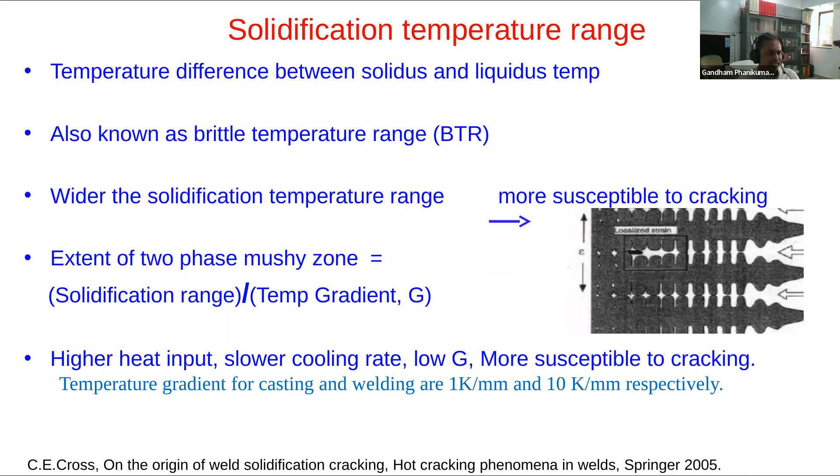Now one can go on to see microstructure effects on how to prevent cracking. Eutectic fraction of alloys is very important, because if you have some eutectic in the alloy towards solidification completion, it helps, since that eutectic solidifies at a slightly lower temperature compared to the rest of the alloy. So it is available as a liquid, and it will go and fill the gaps, and therefore it heals the cracks and prevents crack formation.

So one solution for any alloy with a cracking problem is to try to move the alloy composition closer to the eutectic in that particular alloy. Eutectic means it is easily solidifiable or castable, and therefore eutectic compositions are the best when it comes to avoiding cracks. Of course, you cannot always choose eutectic alloys, so at least you can have a eutectic liquid present in the alloy, which will help in reducing crack susceptibility.

Now, the physics of it, how it is happening, is here. If you take the solute availability, the liquid that is able to move in between the grains of the solid can go on and heal the cracks, and if it doesn't, then there's a problem. Of course, if you have equiaxed grains, there is no problem at all, because there is no channel that can be cut off. The liquid is all around the grains, and therefore that will be least susceptible to cracking.

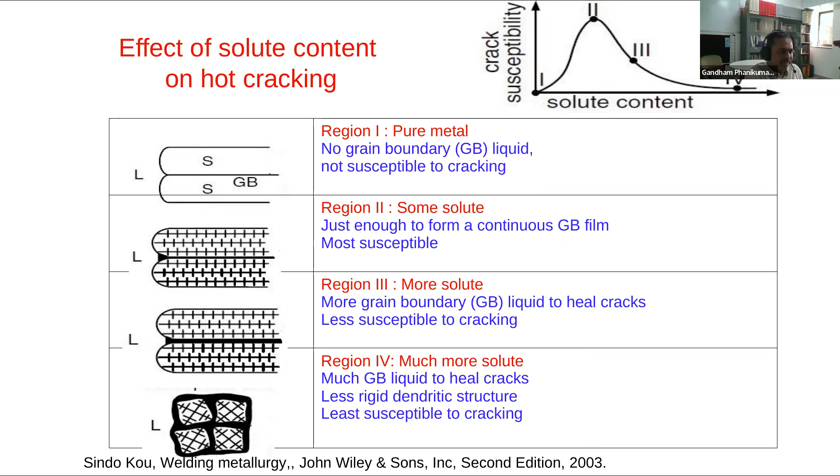Now, the freezing range also gives a hint about the cracking susceptibility. For any alloy content, if you take the case of aluminum copper alloy, around 4% copper content is where the freezing range is maximum, and that's also the alloy for which the crack length is maximum. So you can draw a thumb rule: if the freezing range of the alloy is more, that is, if the difference between the solidus and liquidus temperatures is more, then the crack susceptibility is more.

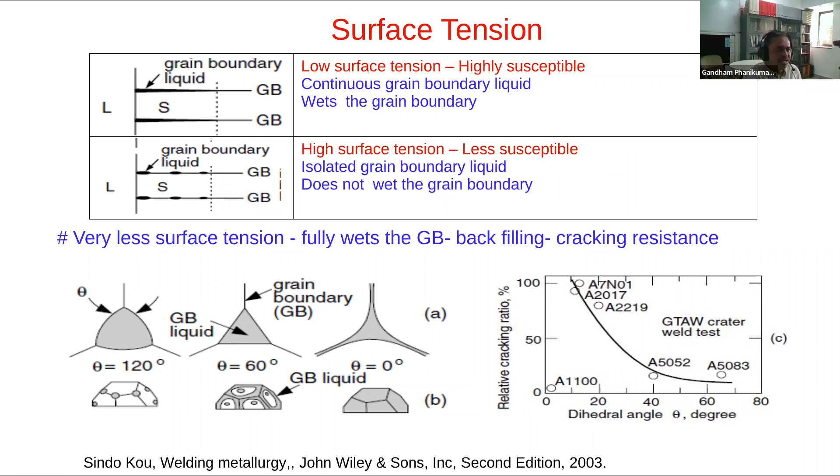And how does surface tension affect this? That also can be understood as the way by which the liquid can wet and go on to fill the gaps, and that also helps determine which alloys can have less susceptibility for cracks.

Fine microstructure of a dendrite is more likely when you have a higher speed. It has also been experimentally observed that if you have slightly higher speed, solidification cracks in aluminum alloys can be avoided. That's our practical experience. So the microstructure starts to play a role in crack avoidance.

How does that relate to printing? It's very simple. If you have a cracking problem in an alloy with dendritic microstructure, try going slightly faster with the laser scanning speed so that your microstructure is finer, and maybe you will have a lesser cracking problem. That's a direction, a thumb rule we can try to use.

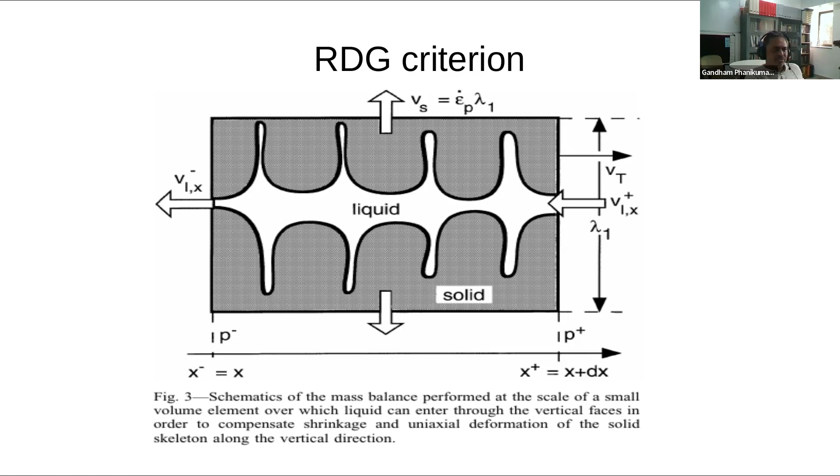That is the idea of how the mathematics evolved, and with that the criterion has been made. The criterion shows that alloy compositions with a high freezing range also have high susceptibility to cracking. So when you choose an alloy for printing, make sure it has less freezing range if you have a choice, or at least has a eutectic formation towards the end of solidification, so you can avoid crack formation.

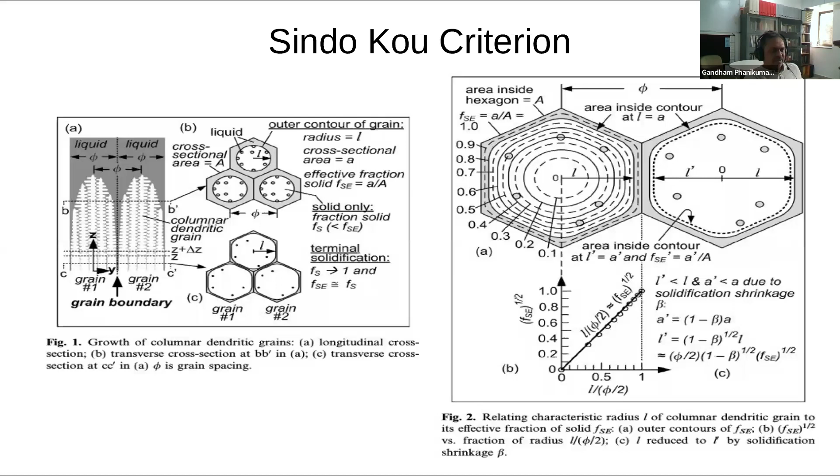Microstructural assumptions made in Sindo Kou's criterion lead to its limited applicability. We have addressed some of these limitations in our recent studies. Sindo Kou's criterion only grades alloys by cracking susceptibility, but we can also predict crack-free processing regimes using this approach. Here is the equation.

So either you design the phase diagram or choose the alloy such that the last solid to solidify forms over a small range of temperature, or you have a slightly higher cooling rate—they both give you the same effect. This is a good clue because Sindo Kou used only the first term to grade alloys, and neglected the second term, which comes from the Rappaz criteria.

We looked at the second term also and showed that in situations where there's a cracking possibility because the first part is already bad, you can improve by using a slightly higher cooling rate, keeping the right-hand side term small, so that you can ensure separation doesn't take place. This has been verified with some alloys.

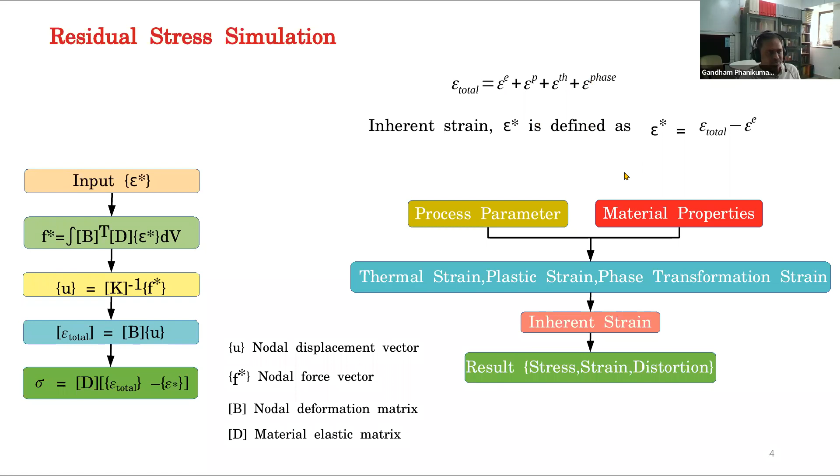And they can take into account the thermal stresses, thermal strains, and phase transformation strains, and so on. So elastic, plastic, thermal, and phase transformation—all the strains can be taken into account.

And we can then go on to quantify the residual stress in any component using the X-ray diffraction technique. We can also do other techniques like hole drilling or whatever, but X-ray diffraction is the most commonly used.

So why we do it is because we want to bring the residual stress down to a very small value, so that there is no accumulation of residual stress as the component is being built, so that the component doesn't crack in the end.

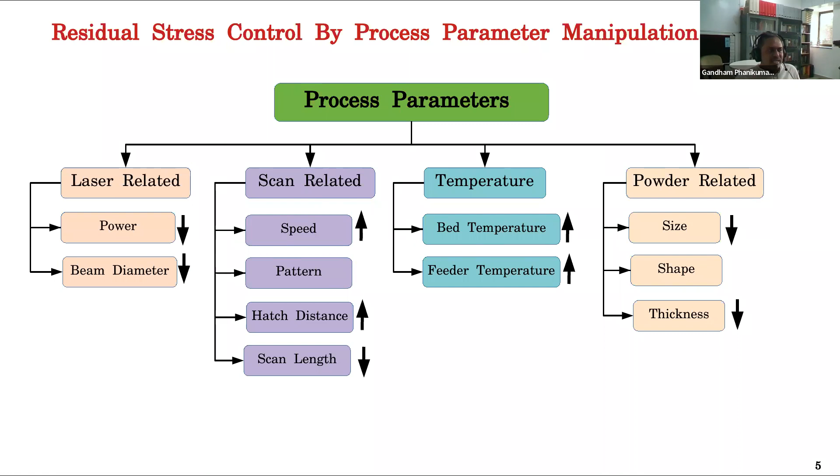So we look at all the parameters and see which parameter affects the residual stress, and which way, because theoretically it can be done. And that gives us a hint on how to play with the processing conditions during printing so that the residual stress is under control. The arrows show you which way the residual stress is affected when you change that particular parameter.

You can also bring the residual stress under control by having a scanning strategy. The rastering can be changed in such a way that the residual stress is not accumulated in the plane, and then plane by plane, etc.

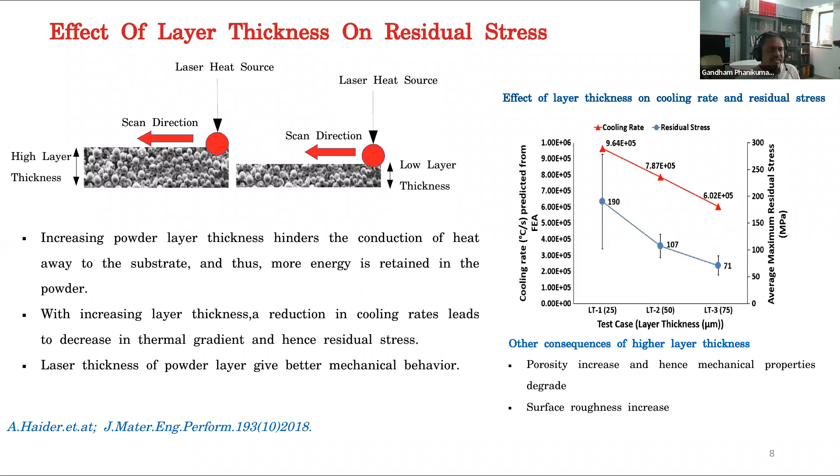That is also something that can be done, and you can play with it by computer before you go on to build. You could also play with the thickness of the layer—we have done some studies to show how the individual layer thickness can also play a role in the accumulation of residual stress.

And of course, if you don't have the residual stress under control, the choice of energy parameters can also start to aggravate things. So you have these defects that we talked about earlier in the context of porosity—they will actually be much more aggravated if your residual stresses are slightly high.

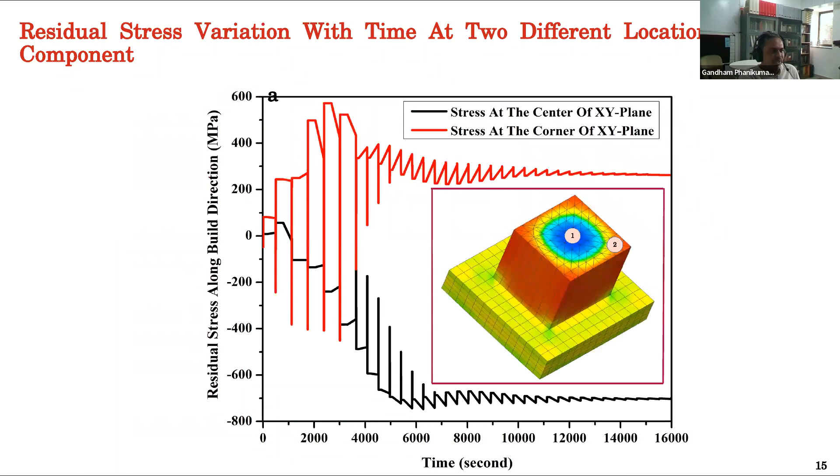So maybe I'll just show you one last thing. These are some works that we are doing about the ICME approach. I should close now.

So in the last two slides, I show you the cracking susceptibility today in additive manufacturing. We are able to predict it by computational methods, and we are developing an integrated approach of many tools so that we can attack the 3D printing problem, understanding as many features of the physics as possible through computation.

In fact, we have already demonstrated it by making a very good component in the very first iteration when we worked with Professor Keshavan's group on Haynes 282 alloy, and we have already submitted one manuscript for that recently.

So today we have this ICME approach that is possible—an integrated approach to combine all the scales, from the component to the microstructure and down to whatever is happening at the atomic and molecular scale. And therefore we can actually build defect-free components by understanding thoroughly.

I encourage all of you to not ignore the metallurgical aspects I have talked to you about in the last two hours, and ensure that whenever there's a problem with microstructure, residual stress, cracking, or defects, etc., please go in depth into the formation of those for that particular alloy.

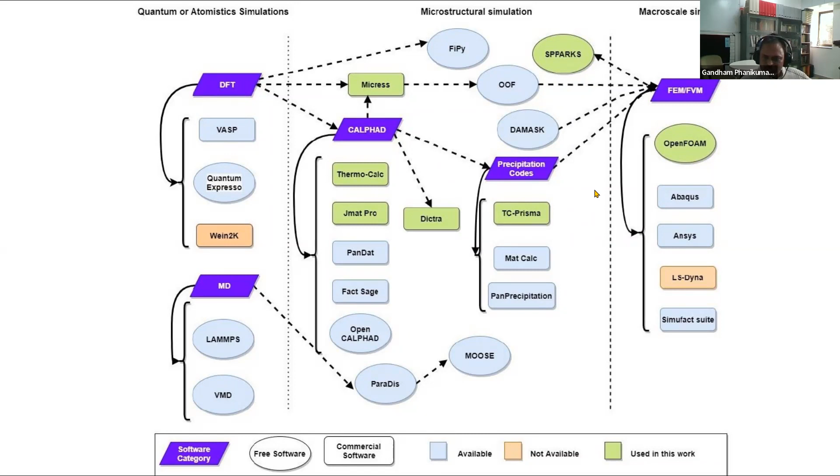Okay, so if you have any questions based upon what we have discussed, you can ask me. I have tried to cover as much metallurgy as possible to explain both microstructure formation as well as defect formation. It could be perhaps a little more material to absorb, but I want to also give you confidence that there is a lot that we know about these things.

So I want to give that sense across, because many people assume that 3D manufacturing, 3D printing is like—you have a design, you print a part, and there's nothing else to do.

It's far from that. There's so much still to do.